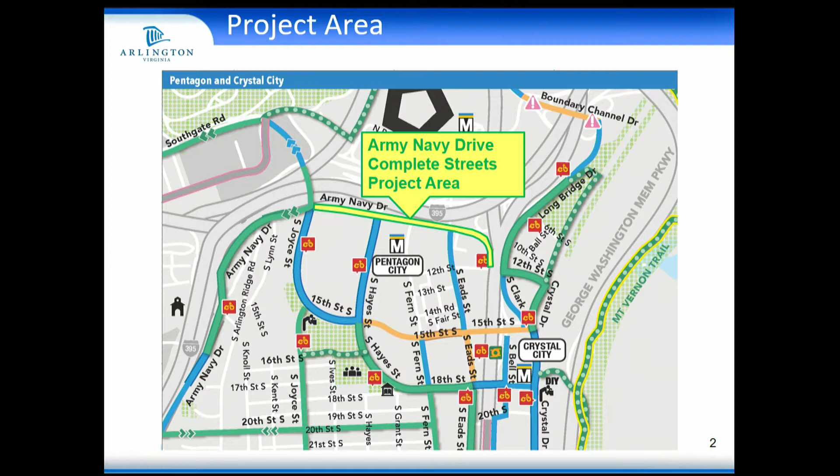Hello, my name is John Lawler. I'm from Arlington County DES. I'm the project manager of the Army-Navy Drive Complete Streets project. This is a 0.8 mile long project in Pentagon and Crystal City. It basically starts at South Joyce Street and ends at 12th Street South. The goal of the project is to make Army-Navy Drive a much safer street, and improve mobility for bikes, pedestrians, and bus users, as well as really making a nice complete street.

Today, this is probably one of the most unique streets in the county because, as you can see in these pictures, we have missing crosswalks and curb ramps and pedestrian signals at traffic signals. You don't really see that throughout the county. The road used to be VDOT right-of-way. Some of it still is VDOT right-of-way. VDOT transferred some of the right-of-way to the county as part of the Columbia Pike streetcar, back in 2011. The county does maintain Army-Navy Drive, but parts of it, like I said, are still VDOT right-of-way. It has a 35 mile per hour speed limit.

It's primarily designed to funnel commuters to and from I-395. There's heavy peak directional traffic, meaning that when you look at peak hour volumes, those don't equate to the ADT traffic. Most of the traffic is during the peak hours. When you go there at like 11 a.m., for example, there's hardly anybody on the street.

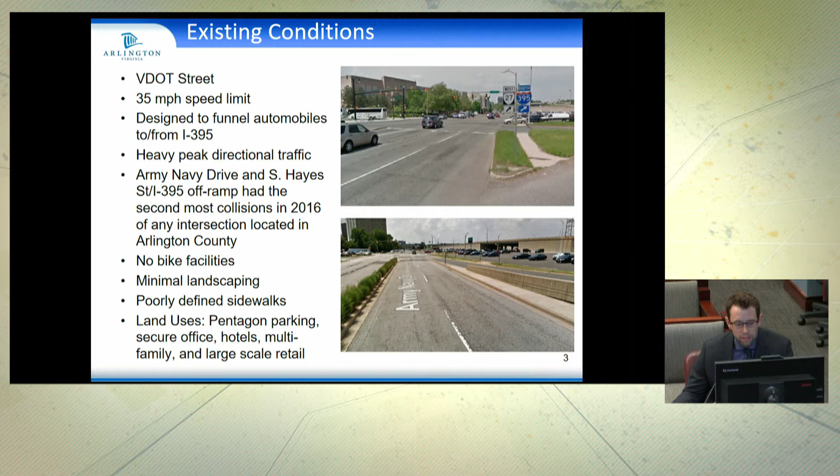The intersection of Army-Navy Drive and South Hayes Street had the second most collisions in Arlington County in 2016. It's typically ranked second or third in the county. There's no bike facilities at all. There's very minimal landscaping and very poorly defined sidewalks.

Our goal is to redesign it as a complete street. To improve safety, we're going to do that by narrowing the travel lanes, building a two-way cycle track along the south side, and adding protected-only left turn phasing at the signalized intersection. We're updating all the street lights and traffic signals, and we're going to plant a bunch of street trees. We're going to improve multimodal access, improve transit travel times and reliability, and really enhance Army-Navy Drive as a key entrance to Pentagon City and Crystal City, as well as reduce stormwater runoff.

We started our public engagement in December 2017, after our traffic model was approved by VDOT. We've reached a lot of people using a variety of tools and methods, such as SurveyMonkey surveys, design workshops, open houses, and meeting with the Bicycle Advisory Committee. We basically received a lot of data from the community as input for the project.

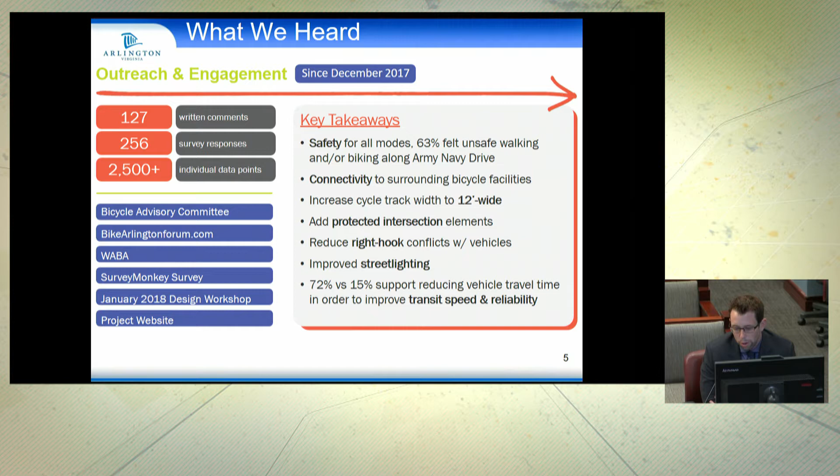Based on our survey, 63% of respondents said they felt unsafe walking or biking along Army-Navy Drive. They had a lot of issues with how it connected to the surrounding bicycle facilities. Our original concept showed a 10-foot wide cycle track, and the public really wanted us to increase that to 12 feet, the NACTO preferred standard, as well as add protected intersection elements where possible. They also wanted us to reduce right hook conflicts with vehicles and improve the street lighting. One other interesting factoid: 72% versus 15% supported reducing vehicle travel time in order to improve transit speed and reliability.

I'll start by showing you all the different sections. This is a 0.8 mile long project, so we'll go block by block. This is the first block, Joyce Street to the mall, adjacent to Pentagon Row and the South Hayes Street Pentagon parking lot. On this section, we'll have curbside dedicated transit lanes, and we'll always have the two-way cycle track along the south side. Here's an aerial view, and there's the plan view.

So we'll have a floating bus stop island here. I think this will be one of the first of that style in the county. Basically, we're consolidating the Pentagon City Mall stop and the Harris Teeter stop at this location, and this will improve the transit speeds through the corridor.

You can see the curbside bus-only lanes. At the intersection of South Joyce Street and Army Navy Drive, we're fixing the missing bike lane link along the Pentagon Row frontage. Currently, this block doesn't have a northbound bike lane, so we're addressing that issue.

We're improving the lane alignments here so that vehicles going eastbound at Joyce are aligned to the proper travel lanes. At the Pentagon City Mall entrance, we're shortening the entrance throat length for a shorter pedestrian crossing. You can also see protected intersection corner islands being added in the southeast corner of the South Joyce Street intersection, as well as the southwest corner of the Pentagon City Mall intersection.

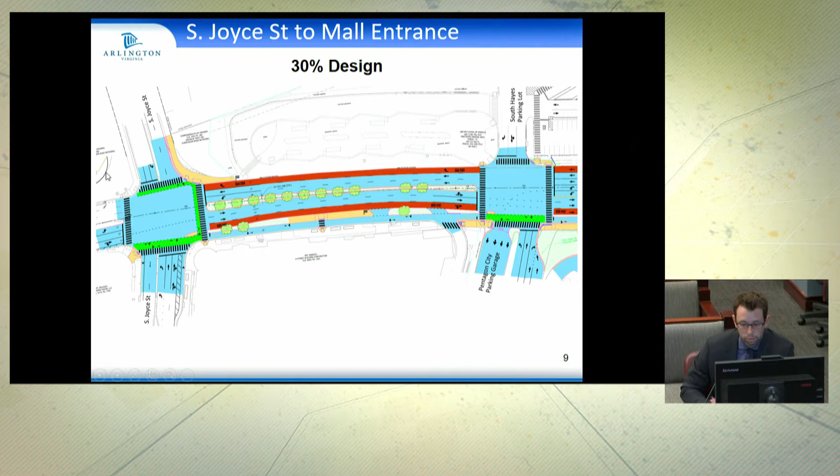The next section, moving east, is between the Pentagon City Mall and South Hayes Street. Here's the aerial view of this section.

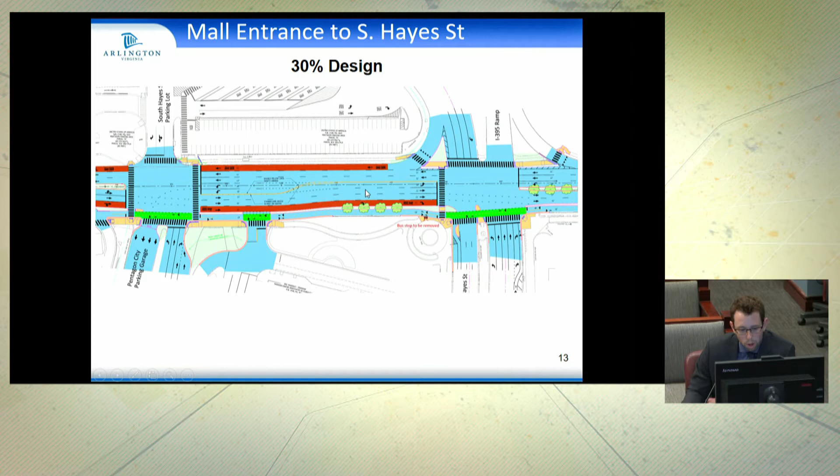On this section, we're adding a second left turn lane to turn into the mall. Our traffic model showed that in the morning peak hour, this turn lane was backing up onto I-395, causing a lot of gridlock and delays. We were also concerned about the safety issues of people getting rear-ended on the ramp, so adding that second left turn lane addressed all those situations.

As a reminder, all the left turn phasing at the signals here is protected, so there's no conflict between the left turns and the crossing pedestrians and bicyclists.

We also consolidated several of the Pentagon City Mall entrances into just one right-in, right-out intersection. Unfortunately, since we lost the raised median on this part, we're using flexi posts to restrict that left turn into the entrance. In the southwest corner of the Hayes Street I-395 ramp intersection, we're adding a bend-out to improve the setback distance for bikes crossing there so vehicles get good visibility.

This intersection doesn't have a conflict between the right turn and the crossing pedestrians and bikes, because we're protecting the phasing here—one of the only right turns so far that we know is protected. So when the right turn has the green arrow, there won't be any pedestrians crossing at this intersection. We also flipped the northbound bike lane and the northbound right turn lane here, because bikes can't travel north onto the I-395 ramp, which eliminates that right hook conflict.

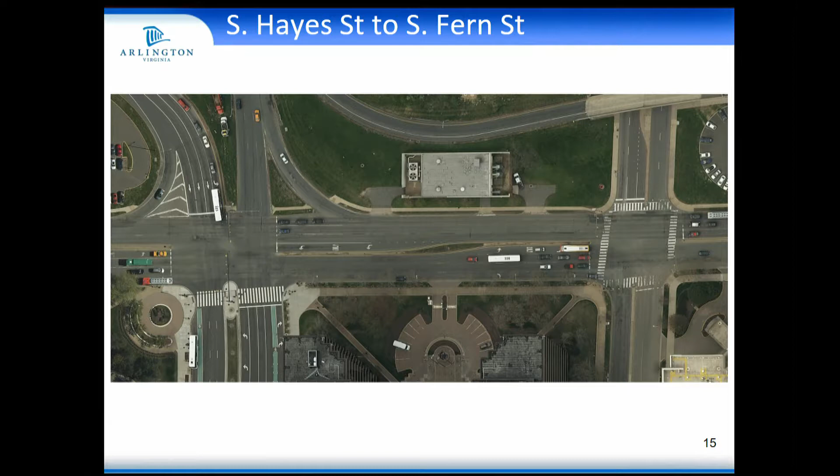The next section is Hayes to Fern Street. It's pretty much the same setup: we have the cycle track along the south side, generally two travel lanes in each direction for moving traffic as well as turn lanes. At the South Fern Street intersection, we do another bend-out to improve visibility for bikes, and also give cars room to sit and wait for a gap without feeling pressured by vehicles behind them to turn too quickly.

Between Fern and Eads Street, again it's two lanes for traffic as well as turn lanes. Eads Street has other plans for continuing its protected bike lane network that we're tying into. However, these require the PenPlace development to widen this side of Eads Street to get the proper roadway width. The Express Lanes project improved the north approach on Eads Street and widened it to add turn lanes so people could get off the express lanes quicker.

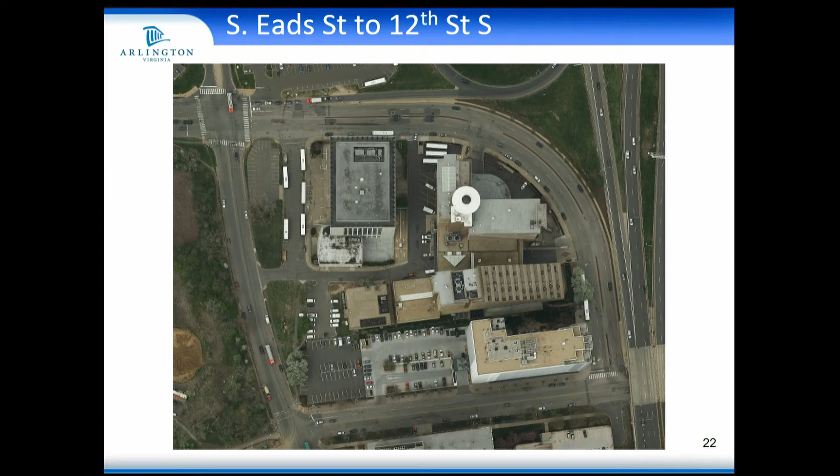One important thing to note at the Eads Street, Army-Navy Drive intersection is that we're restricting the westbound left turn. This is because there wasn't much volume doing this movement. Our traffic model showed that people coming off the Route 110 off-ramp were weaving with traffic going west on Army-Navy, which wanted to either go through or turn right onto Eads, causing a lot of delays and safety issues. So we restricted that left turn. The community hasn't been opposed to this—everybody's been in favor of it.

So I'll talk about the final block, between Eads and 12th. This block's much different from the other four blocks we've been discussing. Basically on this block, the vehicles per day drop drastically. It's only about 6,000 vehicles per day, whereas the other blocks are about 20,000 vehicles per day. So on this section, we're going down to one lane in each direction.

On the north side, we're adding a tour bus parking lane, a 10-foot wide parking lane for the tour buses. That's to offset a lot of the tour bus parking losses that have happened throughout the rest of the county as a result of development projects or road diet projects and things like that.

The fire department made us get rid of the raised median because they wanted 20-foot wide road clearance. So we had to do that. Basically we pushed the road as far to the north as possible, and that gave us a lot of room for this protected bike lane buffer on the south side.

So that really gives vehicles a lot of room to queue up. They can basically pull around, stop here, wait for a gap on that cycle track, and then cross the cycle track to turn into the hotel or 400 Army-Navy Drive. Most of these accesses are right-in, right-outs, or outbound only accesses on this section.

And then the intersection of 12th and Army-Navy will be signalized by the 12th Street project, which you can see there. And so that's the end of the project.

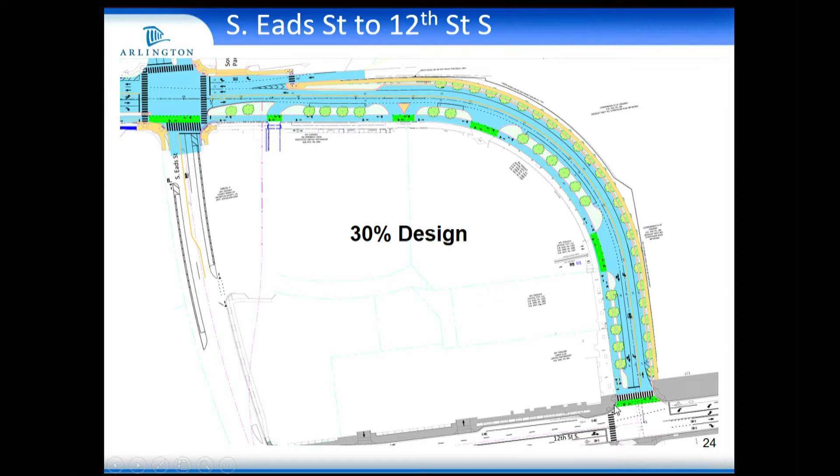For streetlights, we're following the approved county streetlight management plan and doing overhead teardrops that will be county maintained. Streetlighting was important to all the folks we talked to, so we'll be replacing all the streetlights in the project area with these. We haven't decided yet if they'll go in the medians or in the bike lane islands or where. But here's where we are in the schedule.

So we did the community open house earlier this week, and tonight I'm presenting to you all. Basically after that, we kicked off the value engineering study for this project.

So we have federal funding, so we have to do a lot of extra requirements that most projects don't have to do. So we have to do value engineering. Our plans also go through VDOT central office because the project is $18.5 million, so it's over that $15 million construction threshold.

So therefore we have to do the NEPA analysis because of the federal funding. So we're hopeful to do the environmental public hearing in the fall and then finalize that 30% design plan by the end of the year and get the 90% started.

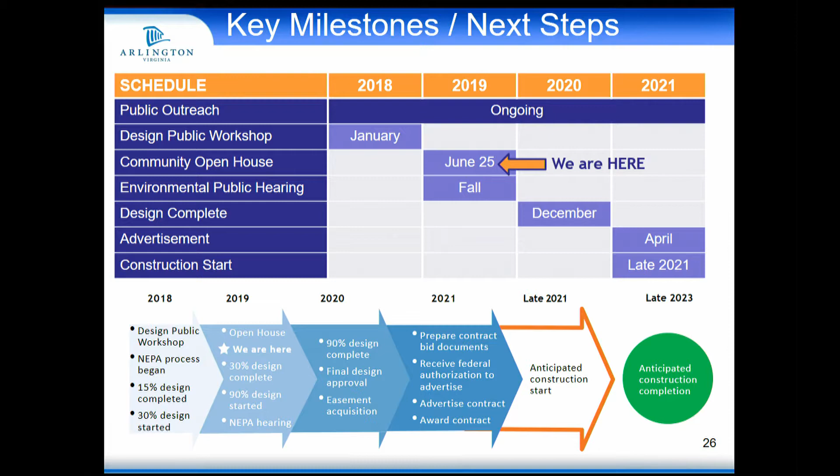And then 2020 will be pretty much finishing up all the design work and acquiring our easements. Then 2021 we'll be preparing the construction bid documents and getting our federal authorization to advertise the contract for construction. So therefore we hope to start construction in late 2021, and we anticipate the project will take about 2 years to complete. And here's the link to the project website.

We're opening the comment period on the 30% design plan tomorrow, so we have just a short 3-question survey. Then we're trying out a new tool where people can go in and add comments on the actual design plan. So any questions?

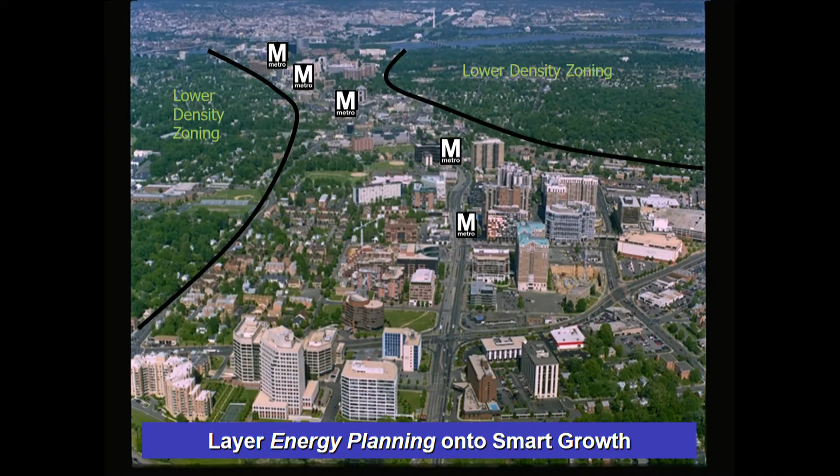The energy planning layer is one we envision layering over the smart, intelligent land use and transportation planning that's taken place over the last 50 years or so. With the Master Transportation Plan, we fully embrace multimodal transportation as espoused in the MTP. But we also recognize where people have to use vehicles, so we're looking at electrification and electric vehicles as a route for people to go, which is what we're advocating as part of this plan update.

As part of those efforts, from 2007 to 2017, the cost savings is just under $5 million per year from the community and county government's perspective, related to AIRE program outreach and various other activities and initiatives. In addition, we've been able to drop our greenhouse gas emissions by 24% during that same time frame.

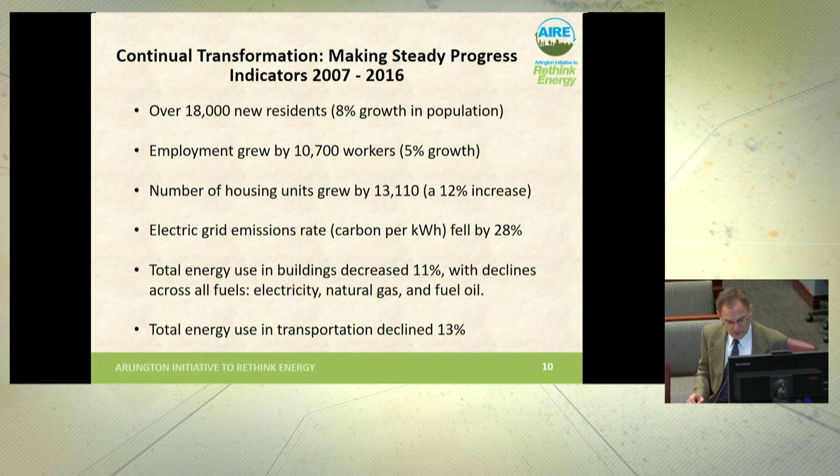This is another way of looking at it: two primary areas where greenhouse gas emissions come from are transportation and the building sector. We started our baseline in 2007 at 12.9, measured in metric tons of CO2 equivalent per capita per year, and it's driven down to 9.1 in our 2016 greenhouse gas emissions inventory. We're making steady progress even though there's been growth in the number of residents, workers, and housing units in Arlington. The grid has gotten cleaner, and the transportation sector has contributed with energy use declining 13%, as well as buildings becoming more energy efficient with an 11% drop in energy use.

This is a very timely update. There's been a lot of change during the last five years in the energy sector and marketplace, as well as activities at the state and international level. There are reports from the Intergovernmental Panel on Climate Change painting a rather bleak picture, and a lot of the feedback we've received over the last year from various groups is that it's imperative that we act sooner rather than later in addressing climate change issues.

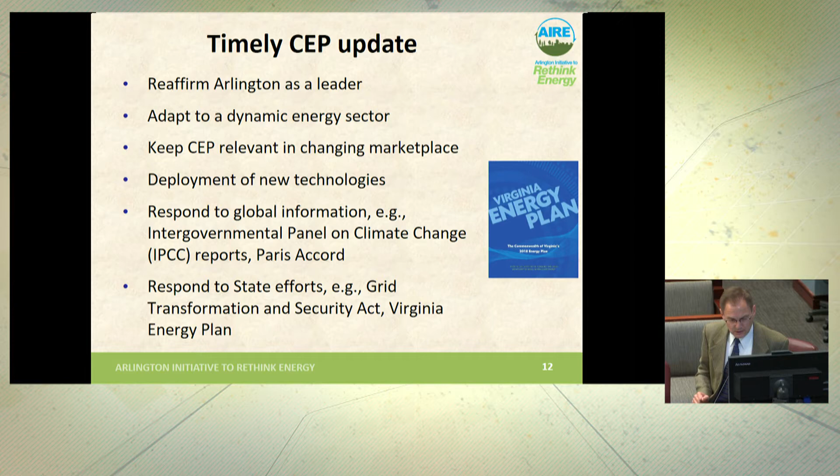As far as community engagement, we've had some major forums. November of last year over at George Mason University, we had 80 representatives from the community who knew about the community energy plan and are knowledgeable about the energy sector come and participate in that forum. And then we had a couple of other follow-up forums at the end of May and the beginning of June of this year.

In addition to those forums, we've also met together with the E2C2, the Energy Committee part of E2C2, as well as working together with consultants to do an updated greenhouse gas emissions inventory, energy model, and conducting market research to make sure that we are kept apprised and staying ahead of the game in terms of those changes in the energy sector.

We've drafted the community energy plan update. It went live May 24th, and since then we've had a June 25th County Board work session earlier this week and gotten additional guidance that I'll talk about in a few moments that have continued to update the community energy plan. In addition to the community feedback, we've also reached out to our colleagues within multiple agencies throughout Arlington County, including our transportation staff, to ensure that we are in concert with the various initiatives happening across multiple departments.

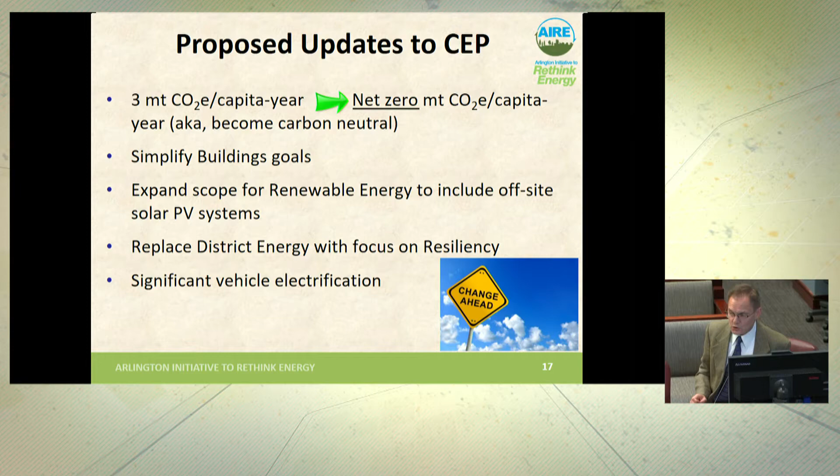Renewable energy is looking outside the county for contractual agreements to enhance solar PV installation outside the county, while at the same time cleaning our grid for residents of Arlington. We talked about resiliency being a new chapter, and last but not least, the electrification of the transportation sector is something we're keeping an eye on and trying to make sure we are set up to take advantage of it full sail.

In terms of the progress, the top line in this graphic shows the line we drew in our 2013 plan from our baseline year all the way out to 2050, gradually dropping down to 3 metric tons. We're updating this graph, as noted by the asterisk. We haven't had time to update the model, but we are working to update it to show how we will get to carbon neutrality by the year 2050, with a breakdown of the various things that will contribute to us reaching our goal.

The top line, the dashed line, is business as usual. It recognizes there will be growth throughout the county, an increase in housing, jobs, housing units, and population. In addition to that, we want to get down to zero, so we're saying the grid, through on-the-books reductions as well as proposed changes to the grid, will drop us over 30% of the way toward our goal. Renewable energy, both in Arlington and outside Arlington through those contractual agreements I mentioned, will contribute just under 10%. The buildings becoming more energy efficient.

And then last but not least, the yellow wedge shows the increase in efficiency in the transportation sector, helping us reach down all the way to about 1 metric ton. That final wedge, the hatched area, is a mix of a variety of things that can happen, whether it's disruption from different technology advancements or using carbon offsets.

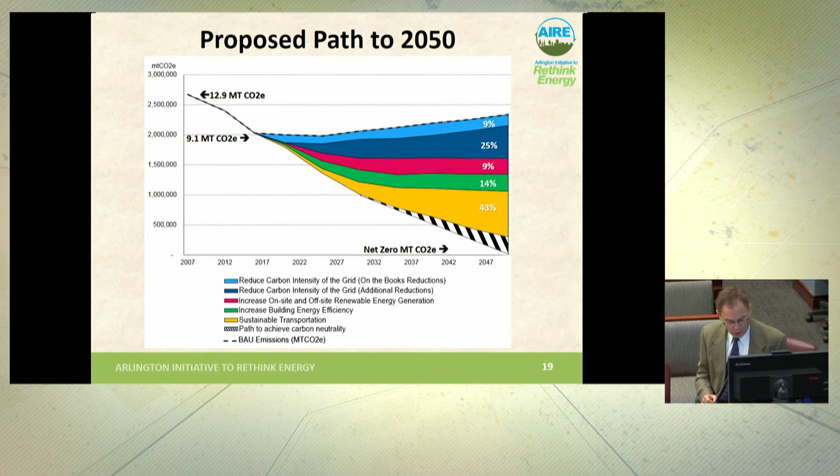As of right now, it is an aspirational goal as we reach to carbon neutrality by the year 2050. This is just to note that there's a lot of variables in play between now and 2050, and we have mapped out a scenario through our energy modeling to get us there, but we also recognize that we aren't able to forecast precisely throughout those years.

So if the grid doesn't get quite as clean as we anticipate, that puts more pressure on the building sector, the renewable energy sector, or the transportation sector to help contribute to get us to our goals. So for the county work session, we asked for guidance on 3 primary areas.

First of all, we went to the board recognizing 1 metric ton was a realistic yet still ambitious goal to reach, but we also wanted to recognize the community was clamoring for 0 metric tons, or net zero, or carbon neutrality.

In addition, the second question was regarding renewable electricity, and to what extent should we put more emphasis on renewable electricity goals, both for county government operations and for the community. Last but not least, we recognize the challenges in doing these various things. We didn't want people to be left behind as we strive to achieve our goals, and how do we address energy equity throughout this whole process.

With renewable electricity, there are many different ways in which we can go ahead and reach our goals. They are listed there, I won't belabor the point, but there are many different avenues and different ways in which it can be done. As for the targets, these are new proposed targets that are in an update forthcoming for that request to advertise report.

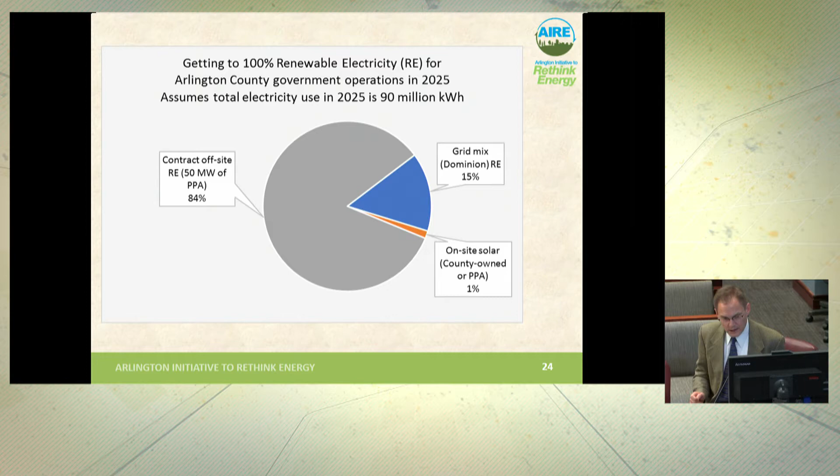In terms of the vast majority of ways in which we can go ahead and do that, it will be through those off-site renewable energy contracts, to the tune of 50 megawatts of power purchase agreements, contributing to 84% of our share of getting to that 2025 goal of 100% renewable electricity for county government operations.

As for the community, this mirrors an initiative set forth by the Sierra Club, and that's 100% renewable electricity for the entire community by the year 2035.

How we get there is a bit more complicated than for county government, but it's still something that we recognize is possible. The grid gets cleaner to the tune of one third of the grid, with the source being renewable energy.

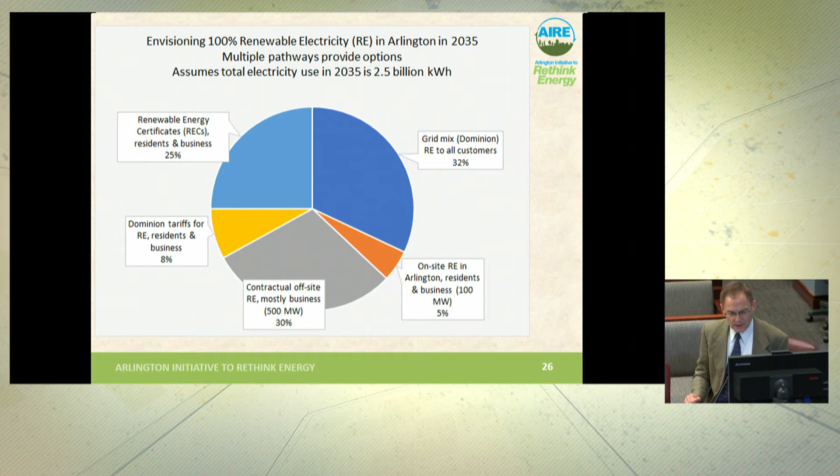In addition to that, we increase the amount of on-site renewable electricity by 100 megawatts by the year 2035. Those contractual agreements for off-site renewable energy, and then also a mix of tariffs and something called renewable energy certificates can be purchased in order to reach our 100% renewable electricity goal.

For energy equity, this is the definition that we currently have in the draft. This is in coordination with our Department of Human Services, and it's recognizing that, yes, economics play a role, as do energy security and the environment.

But we want to make sure that folks from all socioeconomic and racial and ethnic groups are able to take advantage of the various initiatives, whether it's electric vehicles, solar PV, or other initiatives helping us reach our goals. We don't want anyone to be left behind.

So this is the rest of the process. Again, this has been over a year in the making, with a variety of discussions happening throughout many different meetings. We're going to continue to go to various commissions and community groups to talk about the changes to the community energy plan. The board report goes in July for the request to advertise, for action in September.

In addition to action on the community energy plan update, there's also a green building incentive policy that is one of our near-term implementation items, and that will come forward to the board at the same time.

And then last but not least, we do have a variety of tools that are listed in our implementation framework, and in that implementation framework, we're envisioning, once we get clear guidance from the board through adoption of renewed and updated policies, we would update that community energy plan framework accordingly in order to find out how we're going to reach our goals moving forward.

Before I entertain questions, I want to highlight that in the transportation sector, there was one policy that mapped out milestones of how we reduce our greenhouse gas emissions over time. That was one policy in that goal area. We still have that, with updated targets all the way down to 0.5 metric ton by the year 2050.

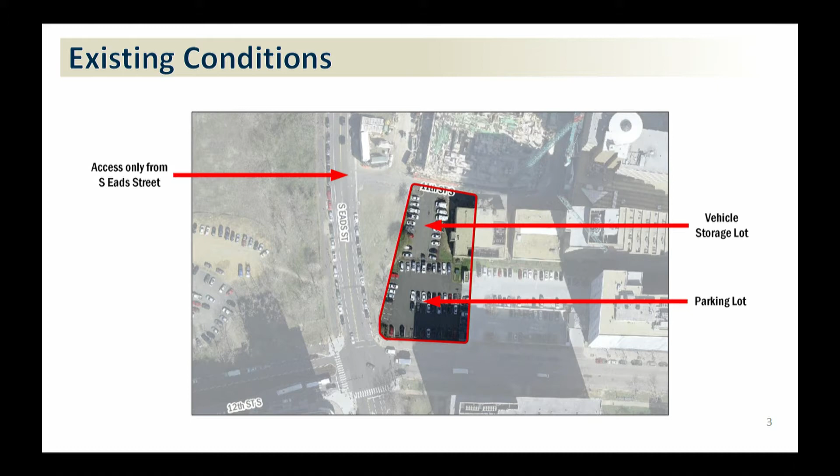If we take a look at the next slide, I want to take some time walking through this. I realize it's a busy slide, but if you look at the red dashed line, those are the boundaries of the parcel. You can see this is a very narrow parcel, there's not a lot of room to maneuver east-west here. So the developer and the architect have had to work very hard to design the site in a way that works within those physical boundaries.

A few other things to note are the site access. Just as there is no site access except from 11th Street looping down south today, that's going to continue in the future. 12th Street South is recommended to be part of the transit way, and we have a very nice walkable retail environment there that we wouldn't want to interrupt, so there can be no curb cuts there.

As you can see, to the west of the site is a county-owned property, a portion of what's been known as the Teardrop parcel. That area will not be suitable for a curb cut, particularly because of the bike lanes running along Eads Street. So a pretty significant constraint in terms of access — we really only have a single option to do that.

The other constraint to mention is utilities. This site is really heavily burdened with utilities. The Teardrop parcel portion is pretty much full of utilities serving the local area. There's also a utility easement on the east side of the site — it's not shown here, but that's why we're pushed back from the property line on the east side. And even 11th Street South has some significant utilities here. So we're bounded basically on every side by utilities.

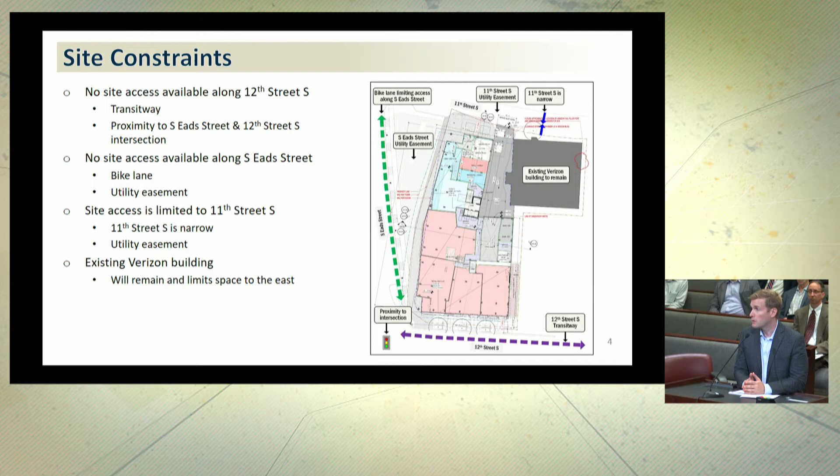If you move to the next slide, this is our plan again overlaid here. The proposal is for a multifamily residential building with 306 residential dwelling units, just under 11,000 square feet of ground floor retail, and below grade parking.

Just to walk you around the site for orientation — on the south side, there's a significant amount of retail. We're very excited about the activation of 12th Street; we think this is going to help catalyze and play off a lot of that success at the Bartlett and elsewhere as we move farther west on 12th Street. As you go up Eads Street, that retail continues around the corner, with the residential access pushed back along Eads so there's a full and active retail corridor before we get there.

On the north side, on 11th Street, you can see there's a pickup and drop-off area for your Ubers and Lyfts.

And then looping around to 11th Street and down that corridor, we've been able to consolidate basically all of the back of house functions to the back of house. There is loading - you can see the Verizon trucks, the residential and retail loading, as well as access to the ramp down for the parking garage.

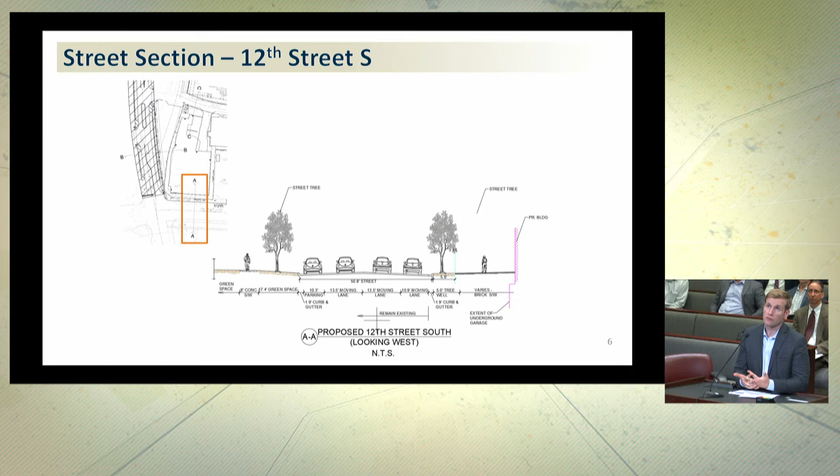So if we move to the next slide, a couple of street sections. I won't dwell on these except to let you know that they're consistent with the recommendations of the Crystal City Sector Plan, which applies here. So here we've got 12th Street. The next slide will go to Eads, and then to 11th Street as we work around the building.

Great. And so then for the next slide, I want to give you an overview of the transportation elements here. Really walkable site, walk score of 84. We're in very close proximity to both the Crystal City Metro Station and the Pentagon City Metro Station. There are also a significant number of bus routes here, 16 in the immediate area, and a really robust pedestrian and bicycle network nearby.

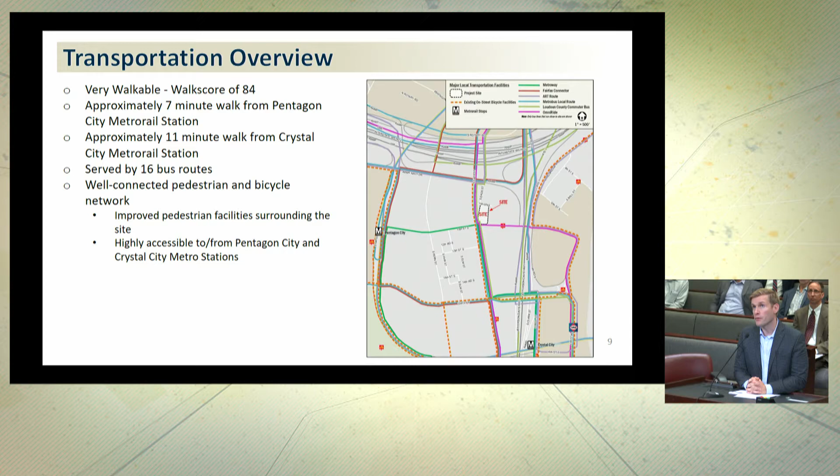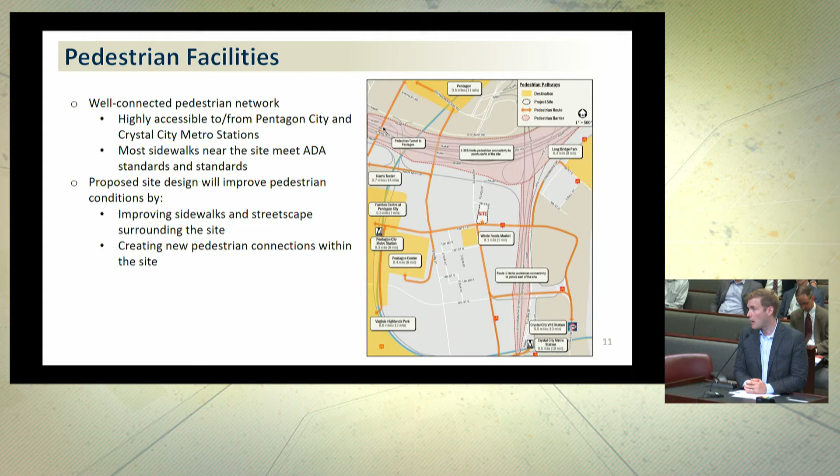On the next slide, a little more information on the pedestrian facilities. I really like this slide because it shows you how many great destinations are within a very short walk from this site - not only the metro access, but the ability to walk directly to a lot of these facilities. There are pretty good pedestrian facilities here today, but with this project we are going to build out the sidewalks along 12th Street and along Eads Street as well.

And then the next slide will give you some information on the parking. The graphic here is an excerpt from the residential parking working group policy that was adopted. And as you can see, based on this site's proximity to Metro, we could go as low as a 0.4 ratio under that policy. The applicant has taken a look at this - they think a 0.44 is the right number based on the market here. That results in 134 parking spaces rather than the 122 minimum that would be required in a 0.4 scenario.

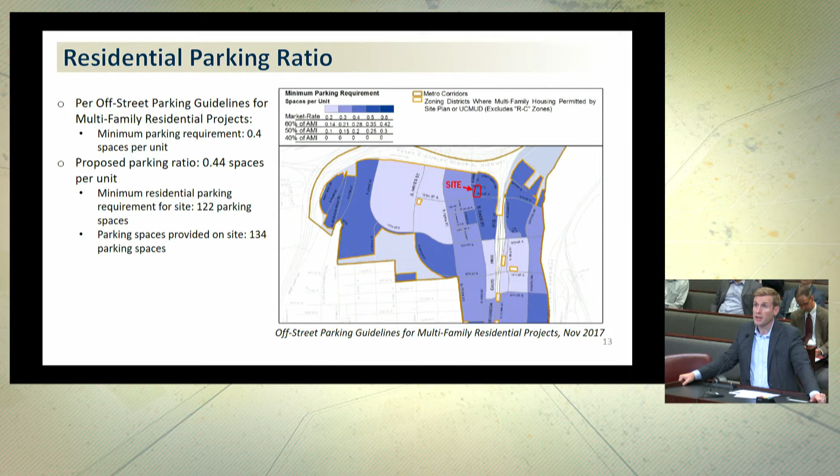Next slide, the pedestrian circulation - this is one we're very excited about. As I mentioned, some great retail presence along 12th Street, a lot of permeability there, and it does wrap the corner onto Eads Street. You'll see there the teardrop parcel, which I mentioned previously - that's that wedge-shaped piece outlined in blue. As a result of that, there are kind of 2 pedestrian paths as you move north along Eads Street. We will be able to either take that outward western swing to be right on Eads Street, or a path that really hugs the side of the building and is closer to that building.

So the county owns that parcel. They are trying to make a determination as to what to do with it. It's certainly our hope that this would be publicly accessible open space, and we think there could be some really great synergies with the retail and the residential entrances playing off that open space there. So speaking of the residential, you can see that that's going to have 2 entrances off of Eads Street north of the retail.

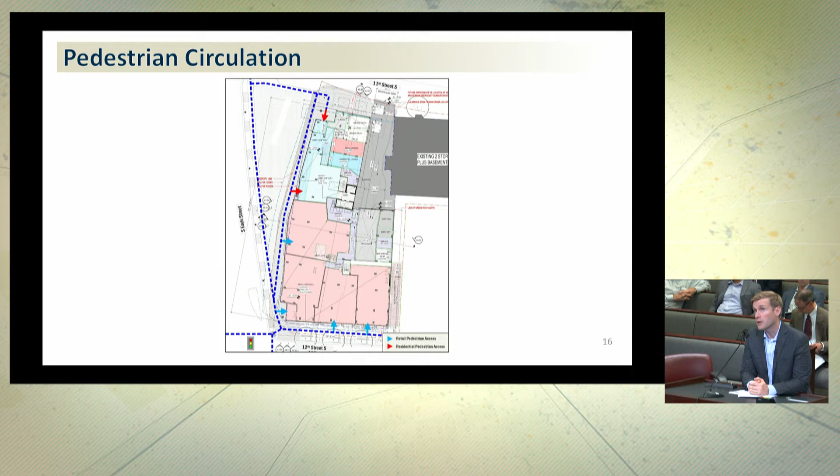So for the next slide, bicycle circulation - just kind of the same old story here. We're coming off of 11th Street down that loading corridor. There's an entrance to the building for bicycles, as well as the ramp down to some of the bike parking.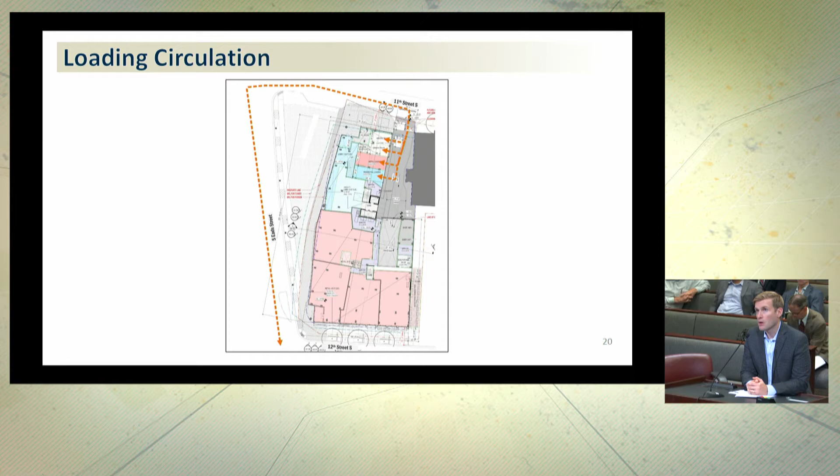Next slide is the loading. I want to take time to talk about this because it's really where the constraints I mentioned earlier come into play. We have a very narrow site along with a requirement to take 2 loading spaces and give them to Verizon. We've worked very hard to design this loading in a way that does not impact the ground floor. We're excited about how the ground floor is going to operate, and taking chunks out of it with additional loading spaces makes it very difficult. Nevertheless, we've managed to put in 1 retail dedicated loading space and 1 residential dedicated loading space. This is something we're continuing to work with staff on, but this is where we are at this point.

On the next slide, more information on those loading spaces, the truck turns for the retail, and the next slide will show the residential.

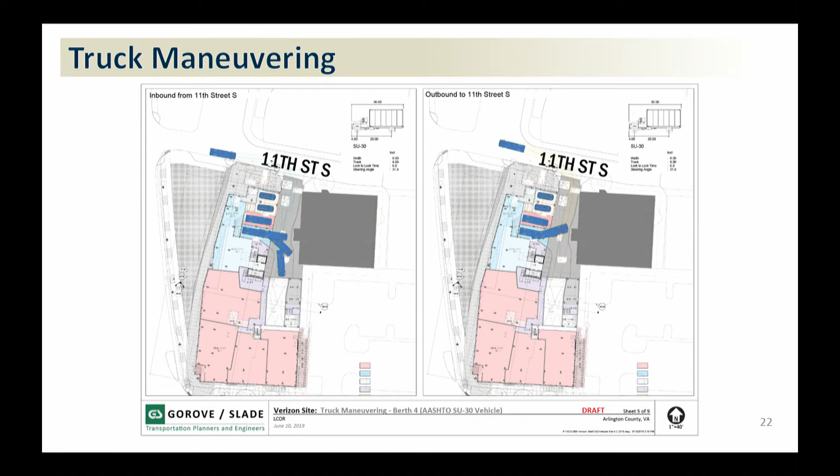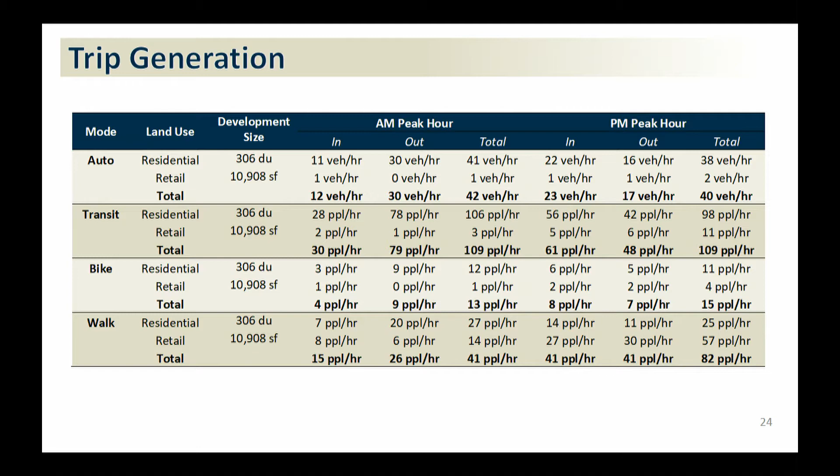On the next slide, some of the trip generation numbers. I was really interested in the number of transit and walking trips compared to auto here. Pretty interesting to see that we really are getting to that multimodal environment that we've seen for this part of Crystal City.

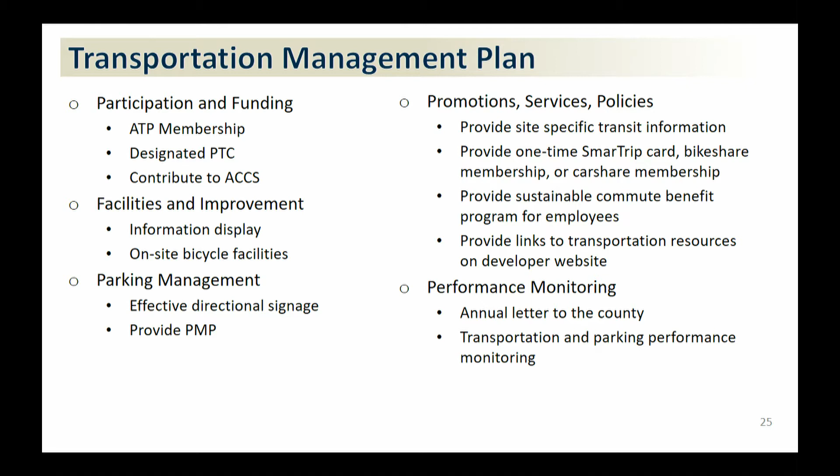And finally, the last slide, this is our transportation management plan that's being proposed. It is what you are accustomed to seeing for projects of this type and size. So that's the entirety of our presentation. We'll be here for any questions, and I appreciate your time. Thank you.

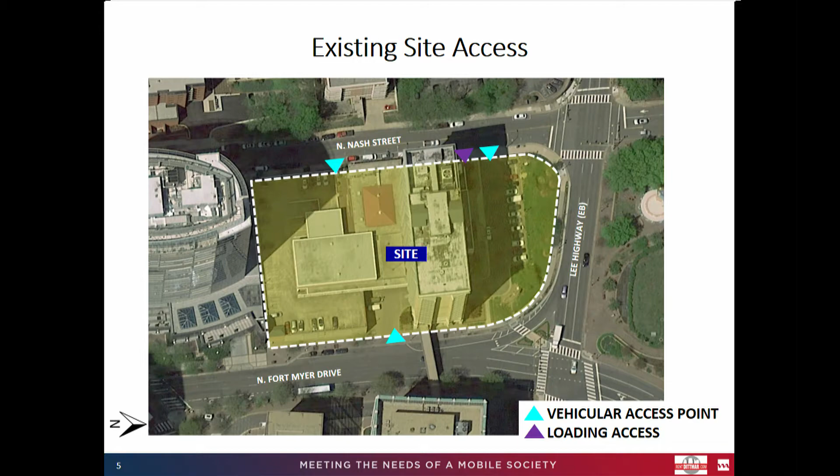This slide shows the existing site access points to the property. On the west side on Nash Street, the northern end is the access to 20th Street. There's 14 parking spaces in the parking lot, which leads to the parking garage that is below the hotel.

Also along the west side, south on Nash Street, is the loading dock that you can see, and then further to the south is the other driveway to the parking garage. There's one access point on North Fort Myer Drive that pulls in front of the building.

This is the proposed access scheme. I'm sorry, I should have mentioned that it's oriented plan north to the right, for consistency. Along North Nash Street, the access to the parking garage for the residential building is on the northern end.

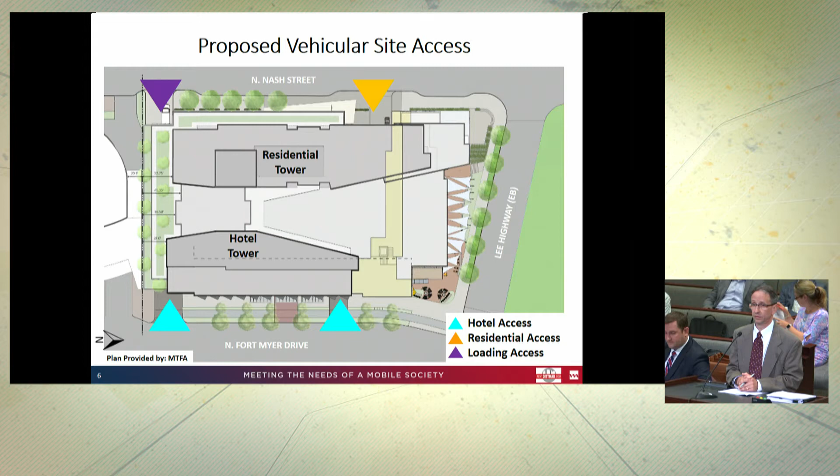And then further down to the south is the loading dock. It's adjacent to the Turnberry loading dock. And then on the east side on North Fort Myer, the northern driveway is inbound only to the porte cochere for the hotel. Further to the south, a two-way driveway leads to the below-grade parking garage.

So I'd like to walk through the street sections that we have. All of these street frontages will be upgraded with the site redevelopment, which will include upgrading the sidewalks and such.

This shows the pedestrian circulation that's around the site. So along North Nash Street, a sidewalk, street trees and such. You can see where I mentioned previously the garage entry and the loading dock access.

And then along Lee Highway, a public sidewalk widening there, and along North Fort Myer Drive, also shown is the sidewalk area, the cycle track, and the main access to the hotel.

What's shown just to the northern portion of the site is the pedestrian pass-through that goes from North Nash to Fort Myer Drive. What you see in the northwest corner, that blue area, is where the sidewalk slope is greater than 5%. So it's an existing condition there, but we wanted to point out that the ADA access would be through the pass-through shown just to the south of that.

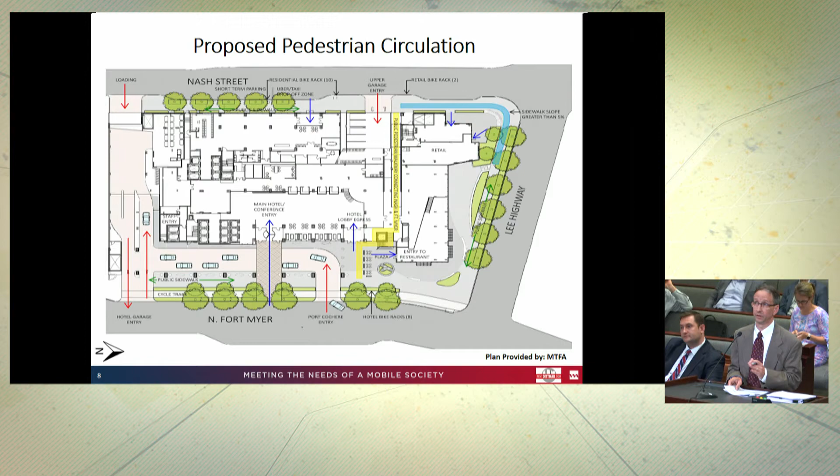So this slide shows the porte cochere, and when we looked at this assignment, we thought about holistically how it would work and how it would need to manage day-to-day operations along with various events at the hotel, given the significance of the conference center.

So what you see here is the entry that I mentioned along North Fort Myer on the northern portion of the site where you enter. It's a 27-foot wide passageway.

Under this condition, this is sort of the typical day condition where there would be a drop-off, pickup. This area will be well managed. The parking will be valet parked at all times. So this will be highly managed through the events.

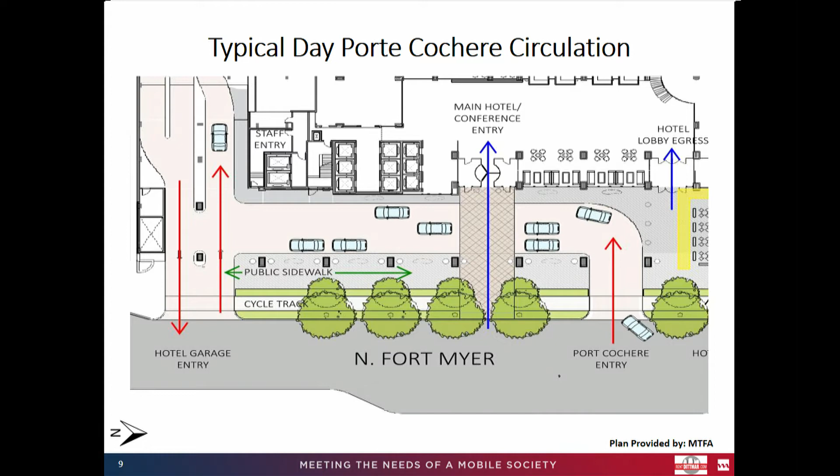You can see to the south where you come through the porte cochere, that's the access to the parking garage, coming back down and then coming back out to leave the garage. The other thing I'd mention is along the sidewalk, the intent is to have a clear pedestrian access that takes you to the building, and also to alert pedestrians and cyclists along the cycle track by using a different pavement treatment, so they're aware they could be encountering pedestrians through that area.

This one is the event day circulation. We anticipate there'll be a number of large events here, so we took a look at what the queuing and storage requirements would be. This would hold about 10 to 12 vehicles. It really is a function of the valet service, which will have to manage those vehicles during these events. We feel this is about what's needed to ensure we don't create traffic problems along Fort Myer Drive that could spill out to the north and reach Lee Highway.

Now we can talk about the loading access. The loading dock is located on North Nash Street on the southern portion of the building, adjacent to the Turnberry driveway, consistent with the Rosslyn sector plan. What's shown on this slide are the various trucks that will use the loading facility: a trash truck, a small box truck which is an SU-25, an SU-40 which is a larger straight truck or box truck, and then a large WB-50, which is one of the tractor trailers.

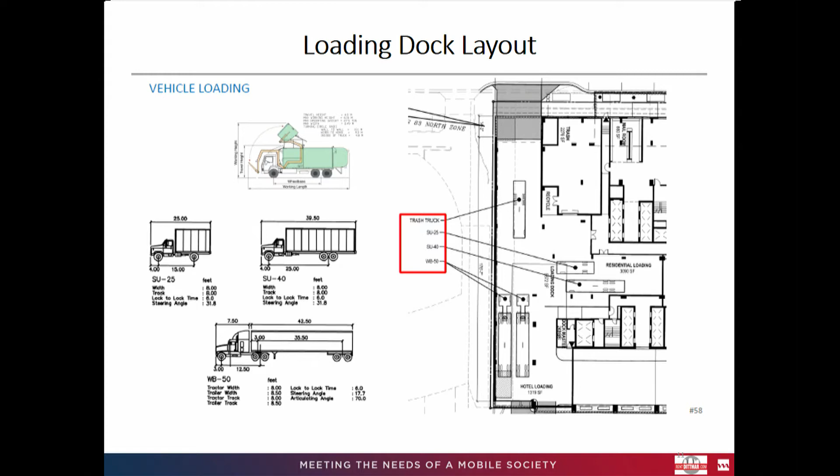These are the loading circulation movements from North Nash Street. This shows the largest truck, so I want to emphasize that this is not only the largest truck, it only represents about 20% of all the truck deliveries that will come to the building. The residential, the hotel, all the loading will be enclosed in this space. On the left-hand side, you can see how a truck would pull beyond the driveway, back into the loading area, the door would close, and all the activity would be enclosed within that area.

The driveway itself - when we talked at SPRC, I mentioned the driveway apron would need to be wider. You can see on the drawing, in the northwest or northeast corner where that curb return is, the driveway is widened there to preserve the on-street parking on North Nash Street. The driveway width for a pedestrian along the sidewalk stays at 35 feet, but the driveway apron picks up another 10 or 11 feet, going to about 45 or 46 feet. In order to preserve the parking and accommodate large trucks, they would travel along North Nash Street, backing in and then continuing north, going out, as you can see on the right-hand side.

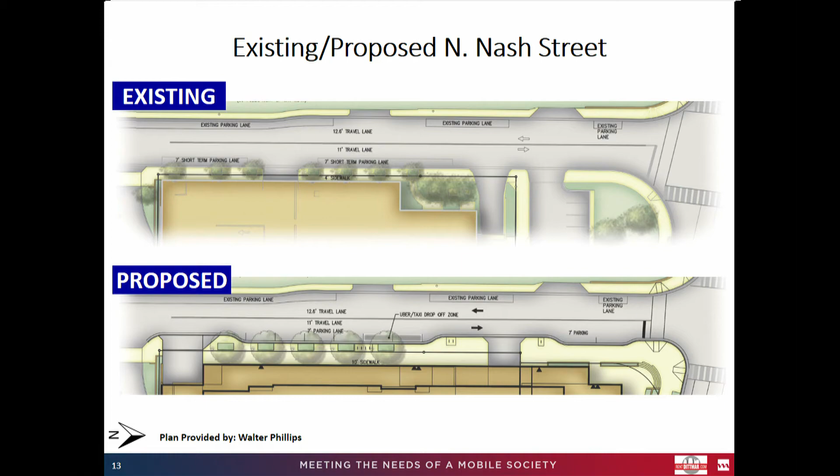Walking through the street sections, the first is North Nash Street. On the north side, as I mentioned, 3 access points are consolidated to 2 driveways in the proposed section. The corner would maintain the on-street parking, and there'd be a 10-foot sidewalk along the frontage, much larger than the 4 feet that's out there today. There are also curb extensions planned along that route to reduce the crossing distance at Lee Highway.

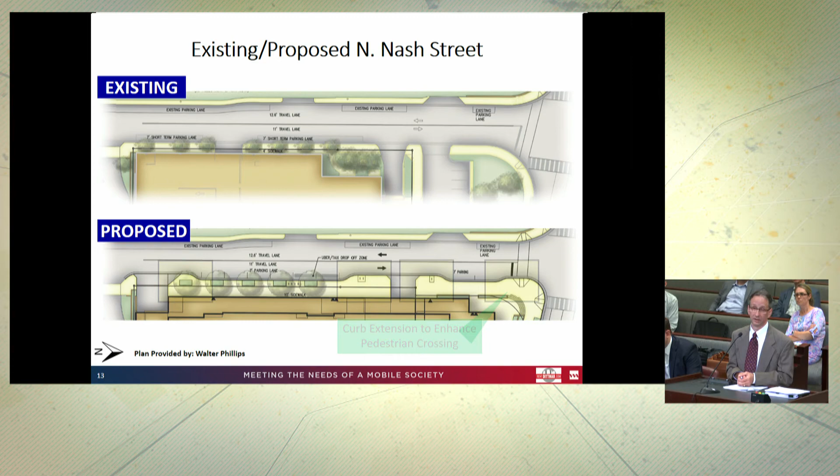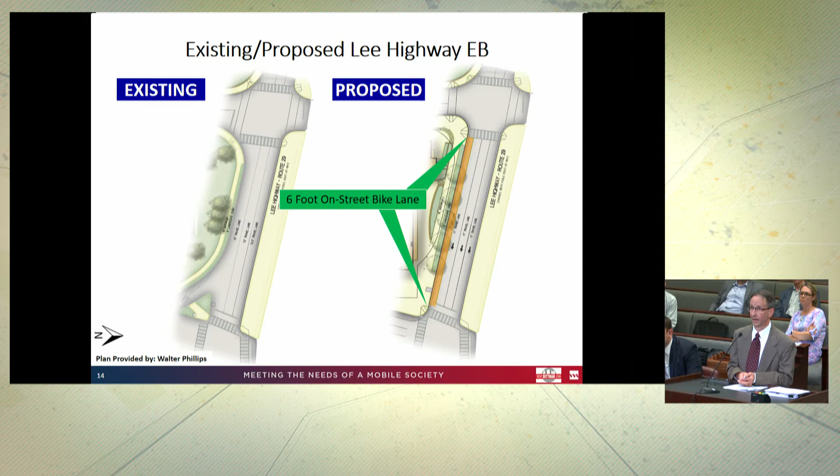This shows the existing and proposed sections along eastbound Lee Highway. Currently there are 3 eastbound travel lanes. Under the proposed design, the sidewalk would be widened to 8 feet while maintaining 3 travel lanes. There'd be a slight shift in the curb, which helps pick up a 6-foot on-street bike lane in that area. Also, the removal of the channelized right turn lane at the corner again reduces crossing distance, creating a safer situation for pedestrians.

This shows the North Fort Myer Drive section. On the north side currently there are travel lanes, a parking lane in front of the site, and 1 driveway. Under the proposed condition, there would be 2 driveways - the northernmost inbound, the southernmost 2-way - then a sidewalk 10 to 12 feet along the site frontage. There's also an 8-foot cycle track along the site frontage, elevated in that area so vehicles know what they're crossing as they drive in and out. Also, the 4 parking spaces would be maintained under these conditions.

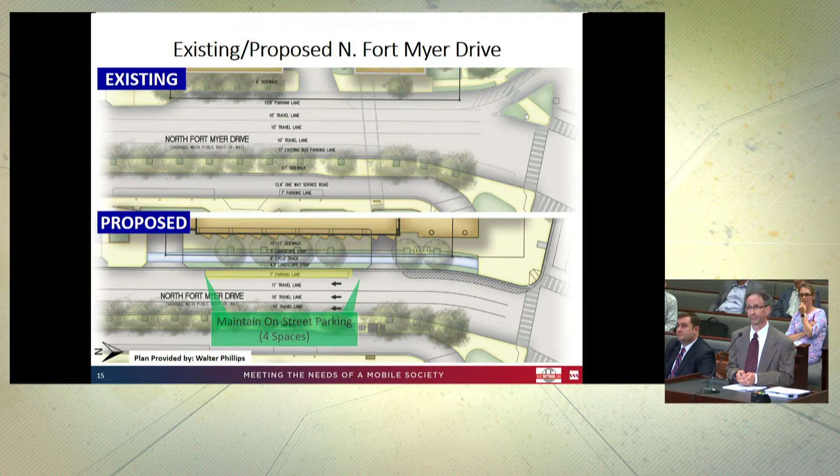So what we're showing here is the ultimate condition, based on the Core of Rosslyn study. This takes in the recommendations of going to a 2-way. There are 3 southbound travel lanes maintained, and the cycle track, landscape buffer, and such would also be maintained. On the eastern side, one of the travel lanes would be converted to northbound, and we would pick up a 7-foot parking lane in that area.

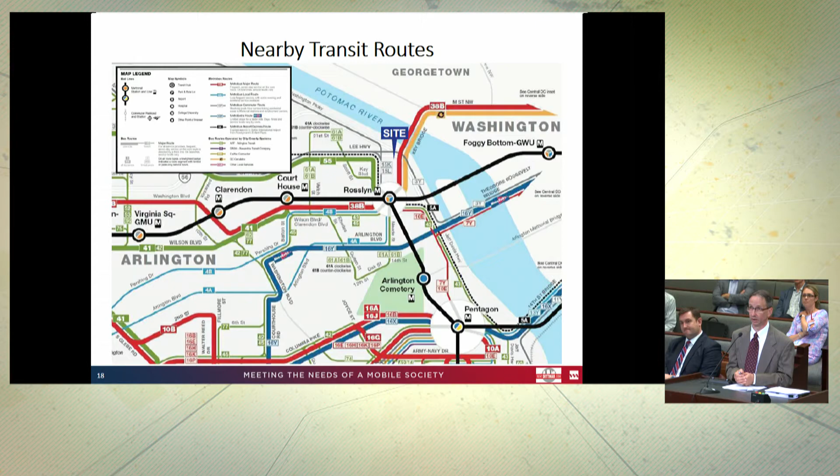So I'd like to just run through the multimodal facilities. We know that this area is well served by transit. There are a number of facilities here. The walk scores are well above the 70s and 80s for walking and biking. There are a number of transit routes as shown on site here at the Metro Rail Station, and bicycle facilities exist around the site.

Also, a bicycle sharing station is on Lynn Street, very nearby. And with the Core of Rosslyn plan, there's a set of bicycle facilities that are all interconnected that will really improve cycling in Rosslyn.

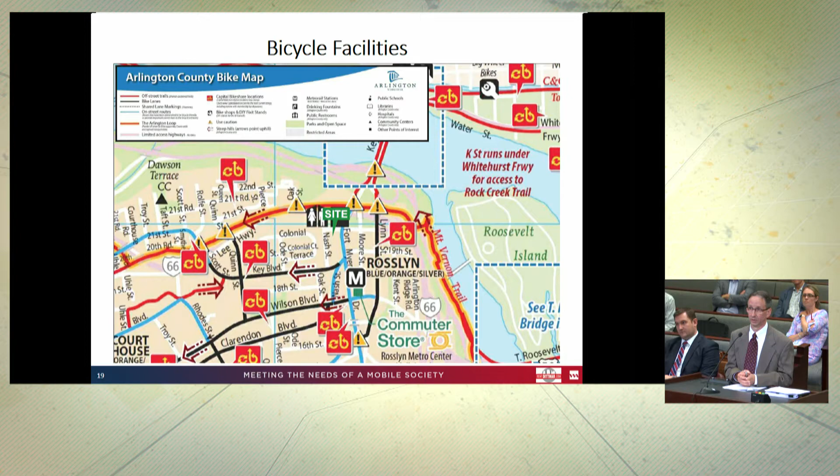This slide compares the trip generation estimate. Under existing conditions, the hotel conference space today is estimated to generate 70 AM trips and 78 PM trips. All the components under the proposed conditions - residential units, conference, hotel space, retail - total 260 AM, 317 PM trips. The net new trips are 190 AM and 239 PM. What I'd like to include is that these trip generation estimates account for the non-auto mode share expected given the location of the hotel.

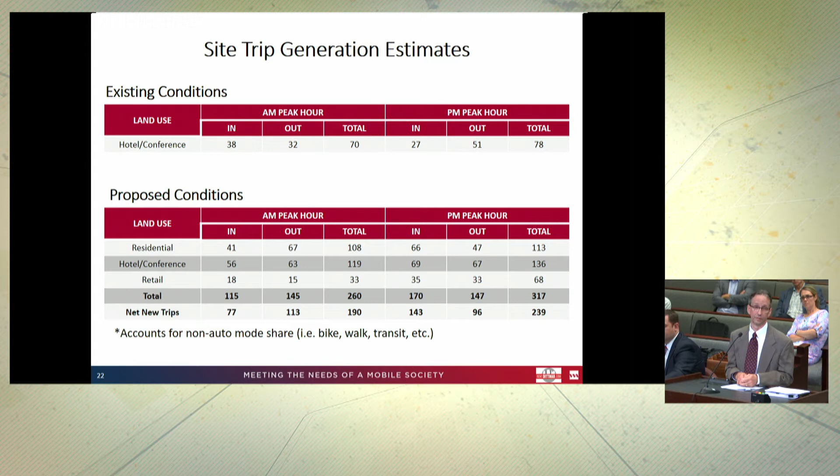So here's a summary of the traffic multimodal study. Again, we looked at 9 intersections, went through the typical scoping process, and looked at 2023 build-out conditions. Under the future conditions, all of the signalized intersections would essentially continue to operate at acceptable levels of service. John, if you could go to the next slide that shows the intersections.

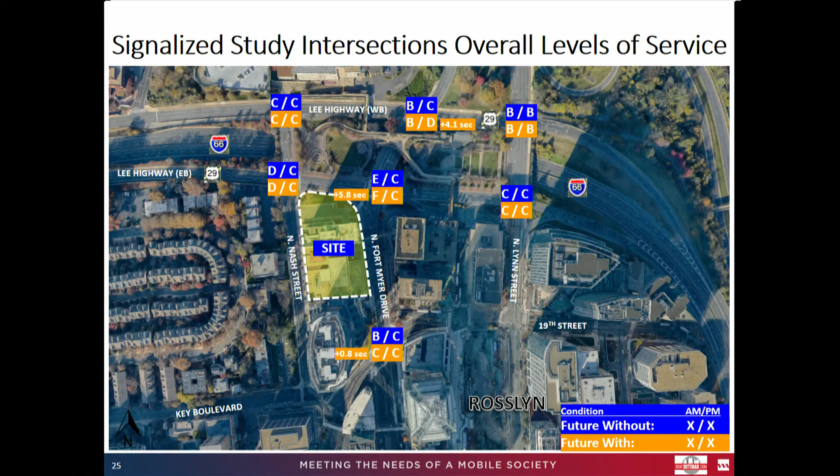Okay, so now we'd like to talk about the parking. So the parking supply, as I mentioned previously, is 818 spaces, in 2 garages. I'll run through some of the on-street parking, then the on-site parking, and then the garage and operations.

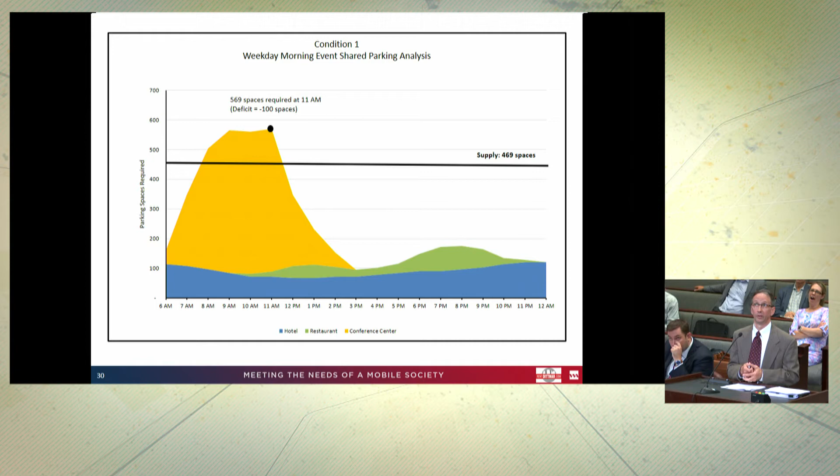This second event is actually 960 patrons. It assumes 2 spaces within the hotel, one with 600 patrons and a second with 360 patrons, and it's an event from 9 a.m. to 5 p.m. This is more like a typical all-day conference.

As you can see, you have the hotel on the bottom, the restaurant space in green in the center, and then the conference attendees who come in the morning, stay throughout the day, and as the conference ends at 5 p.m. it begins to drop off. There's essentially a balance here—we're showing a 17-space shortage under this condition. But under this condition, the non-auto mode share goes up to about 40%, and there's a draw from patrons staying in the hotel, so we're accounting for those kinds of things when looking at the inherent parking demand.

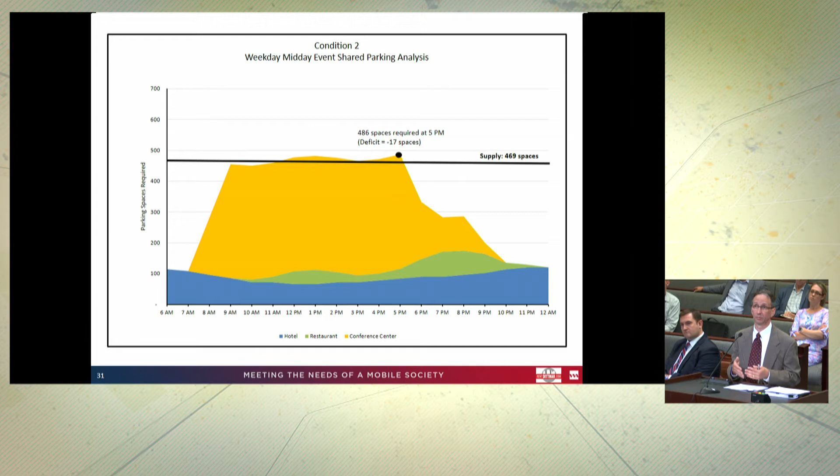The third condition is the weekday evening event, the most intense of all the events. This is also an 800-person event. Demand picks up in the middle of the day but peaks in the evening for the conference center space. This would be like a Friday night event where hotel patrons are coming back to the hotel, and the restaurant is hitting its peak at 8 p.m. When those two overlap with the conference attendees, that's where the maximum occurs.

We're projecting this at 8 p.m. in the evening, with a deficit of 186 spaces. Again, some of that can be made up on the site itself, some would be made up off-site through other parking, and some would be made up by others moving into other modes.

The last event is the weekend condition, a typical wedding on a weekend. The hotel and restaurant space curves are slightly different, but overall similar. The restaurant space is higher here because it's a Saturday, so we expect more activity—an 800-person wedding with attendees and an evening reception. This is lower than the previous case because a wedding has more people staying at the hotel, so the overall demand comes down.

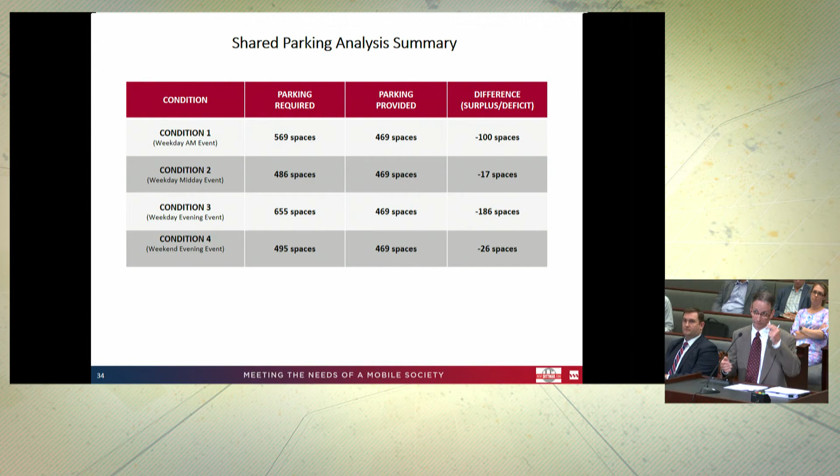The next portion is the Transportation Demand Management Plan. These are all elements I'm sure you're familiar with, typical for this type of project: funding, facilities, carpool, vanpool, and so on. We have a robust network here with plenty of non-auto facilities that help reduce peak hour trips.

One discussion we had at SPRC was: we have 500 residential units, so why do we only have 110 peak hour trips? Most people may own a car, but they don't drive it to work or during peak hour—though we still need parking for them. This speaks to how we'll have a reduction in peak hour trips while still serving the necessary uses.

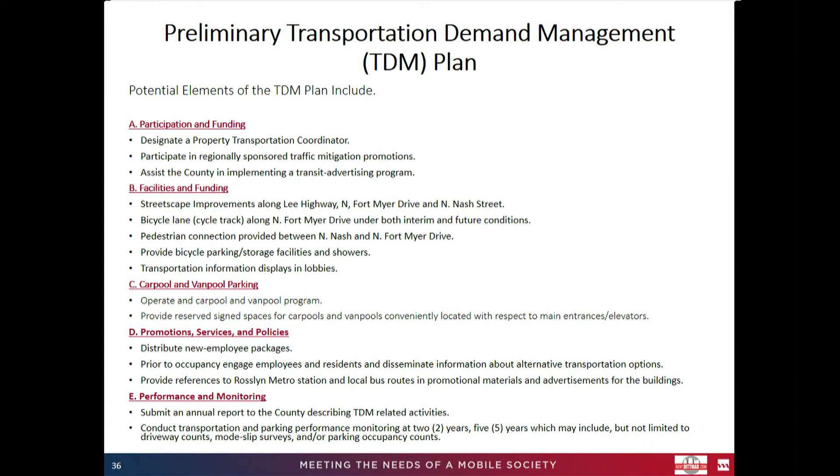Thank you. Does staff have a presentation as well?

Good evening, I'm Dennis Sellin with the Department of Environmental Services Transportation Division. I have a few slides to discuss some of the issues DES has identified with the project.

This project has already been through three SPRC meetings, and fortunately two of our commissioners have been present at those meetings and are aware of the issues. The applicant, I believe, was also intending to bring this project to the board in September.

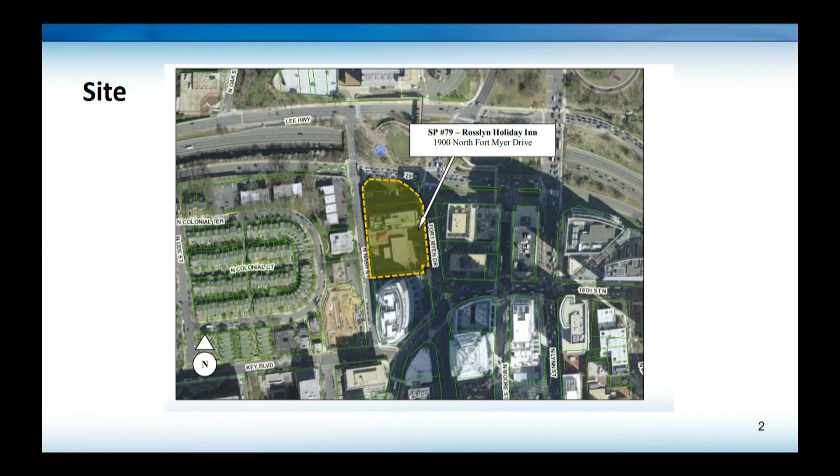One of the overriding issues is that the project is a rezone to CO Rosslyn. There's a combination involved: a site, a street vacation, and a parcel currently owned by VDOT that is to be conveyed as part of the project. So there's a rezone, a vacation, and of course this is a major site plan amendment, which the applicant has already covered.

Typically county staff looks at the overriding policies, and here we have two major documents we typically look at: our Master Transportation Plan, and in this case a recently completed Rosslyn Sector Plan. I've pulled out a couple of the overriding policies we used to guide our review of the Dittmar project.

Those are the design and operation of complete streets, and accommodation of travel growth through shifts to non-automobile modes and improved management of existing streets. I won't read all the verbiage, but those are some of the underlying principles we've used.

With respect to parking, the goal is to ensure minimum parking needs are met while excessive parking is not built, and to allow for reduced parking space requirements for new development. Over the past several years, we've taken specific policy and guidance positions on reduced parking for both commercial and residential projects.

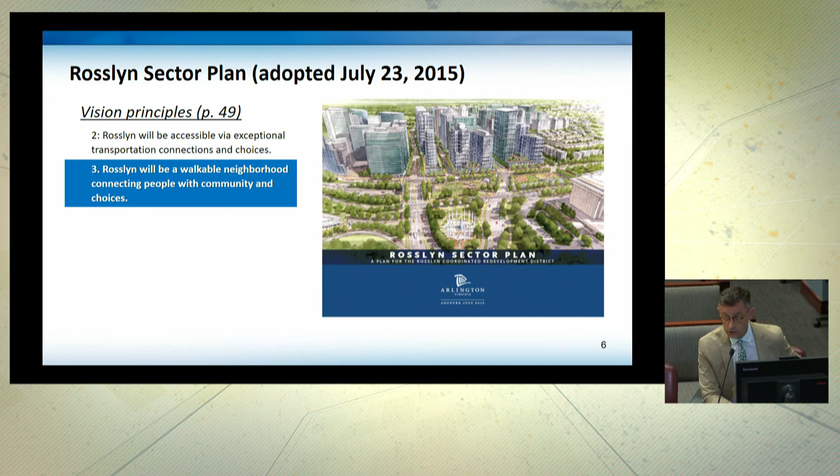So, to be a walkable neighborhood, connecting people with community and choices. When we get to some specifics, especially those affecting this project and site, it's to transform North Fort Myer Drive and Lynn Street into places bringing the Rosslyn community and region around retail, arts, welcoming public spaces, expanded transit and walking connections, to transform the pedestrian and bicycle network into a safer, more attractive, more accessible place to walk and bike, to improve the walking experience with wider sidewalks, new walkway connections, strategies to reduce topographic barriers, safer street crossings, and enhancement of streetscape aesthetics.

Then we get to some of the parking recommendations with respect to off-street and on-street parking. I've highlighted several that are particularly pertinent to this project: to discourage above-grade parking, but permit applying standards for wrapping, and for off-street parking to encourage use of high-capacity vehicle storage technologies. We also have some urban design policies and recommendations that are applicable here as well.

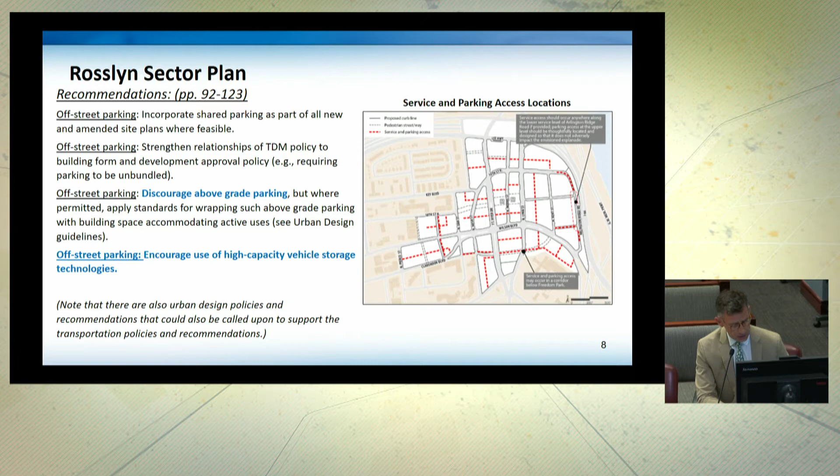One of the outgrowths of the Rosslyn Sector Plan has been the Core of Rosslyn Transportation Study, which has been underway for the past two years. It was either last week or the week before that the team presented its preferred alternative.

I guess I would describe this as having several components, and that will basically be its two key streets: Fort Myer Drive and Lynn Street. Those are going to be multimodal streets that connect the trails at the northern and southern ends of Rosslyn, which are currently not connected, making those north-south connections safe and pleasant places for pedestrians and cyclists.

The major components of the preferred alternative include filling in or removal of the Fort Myer Drive tunnel and the incremental conversion of Fort Myer Drive to a two-way street. The preferred alternative emphasizes enhancing the pedestrian and bicycling networks within the core, including wider sidewalks and continuous protected bicycle facilities on Fort Myer Drive, North Lynn Street, and Wilson Boulevard.

There are changes at the southern tip of Rosslyn, a reconfiguration of Route 50 and Meade Street. While this is a 2030 preferred alternative, our staff does plan to do some tactical one-way cycle tracks on both Fort Myer and Lynn Street as soon as next summer. So this is really a direct outgrowth of the Rosslyn Sector Plan — we will actually be seeing some on-the-ground treatments as early as next summer.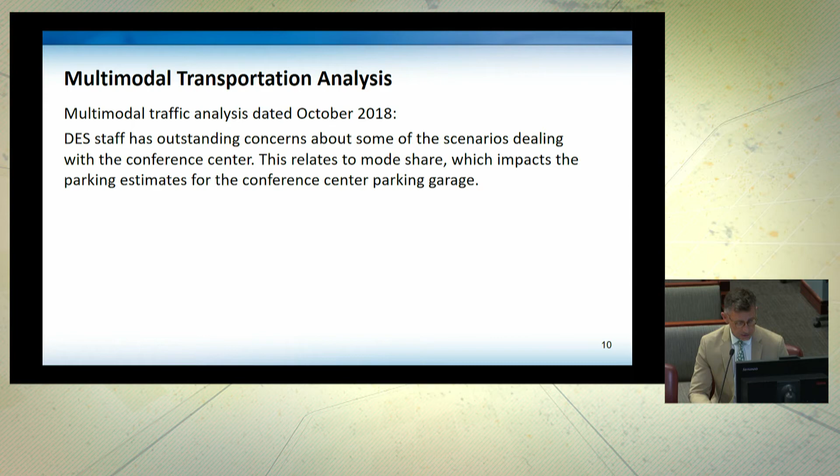It's especially regarding the parking — right now we don't have a way to analyze their parking numbers and validate those, so that's still an open question. We understand the applicant is developing those comps and will have them to us shortly. So that remains an outstanding issue being discussed and negotiated, but we still have questions and concerns with respect to the parking, and county guidelines, requirements, and policies for parking for the hotel and retail.

I think there's a couple of things about the parking. One, we believe it's going to directly affect both the mode share, and it also affects the building bulk and mass — so it has both a transportation and an urban design component.

While there is a 0.7 per room Rosslyn requirement for the hotel rooms, we typically have accepted about 0.5 for hotel. So from 241 spaces, we would consider possibly 172 spaces for that.

There has also been discussion about the conference space, the use of one space per 3 seats with the public assembly space standard that the applicant has referenced. Our zoning administrator has specifically stated that that standard does not apply to conference spaces in a hotel. So that is why this issue about the conference center in a hotel is outstanding. They may be using it as some sort of a guidepost, but it is not to be confused with an actual requirement for assembly space in a hotel.

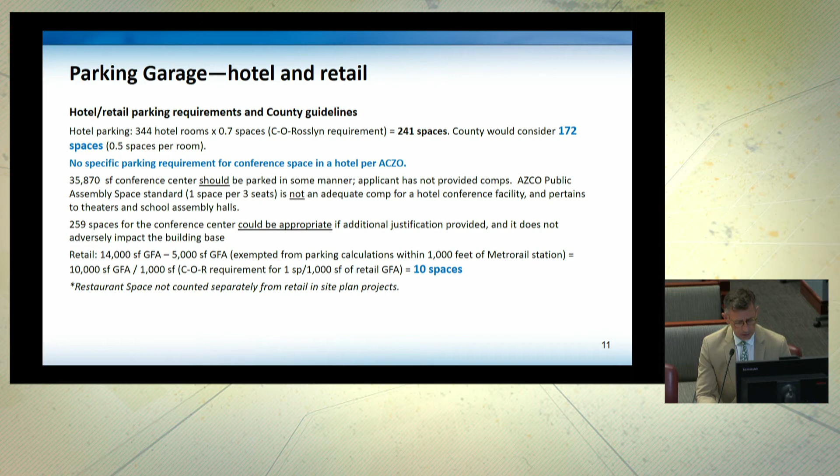So again, we think there are advantages because of the location of this project in the center of Rosslyn that the applicant should be taking advantage of and isn't.

Under some of the new residential parking guidance, it's actually 0.4, which we would consider reducing to 0.2 if the applicant did additional bicycle parking and/or TDM. That means for 500 units, they could go as low as 100 parking spaces, with an additional 25 spaces for visitor parking, so 125 spaces total. I haven't really done the math, but it would be significantly lower than the 818 spaces the applicant is proposing. You can do the math, but it's smaller.

So we get to this issue, and it has to do with the building's base. Under the sector plan, there is a recognition that buildings have a base, a tower, and a top. Here we're seeing the base, and there is 3 to 6 stories recommended, but the applicant has a 10-story base, and a lot of that base is their garage.

So the issue here is directly affecting the architecture, which I know is not transportation, but it's because of what we believe is an excessive amount of parking on this site, which they may be able to justify. But we do believe there are policies and guidance, particularly given the location in the center of Rosslyn, that support a lower number of parking spaces that could and should be provided in this facility. We think the applicant needs to do a lot more to address some of the sector plan recommendations.

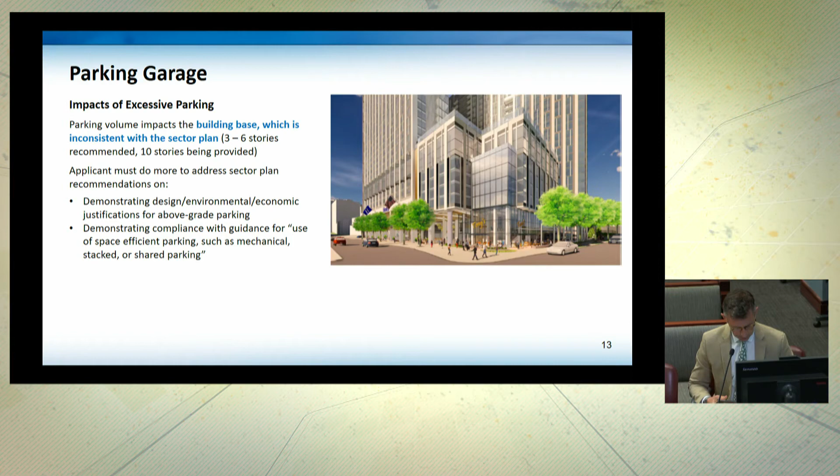One of the things that happens with this kind of facility, especially one that replicates to some degree what the applicant is proposing, is that once the architecture begins subsuming and taking over the Porte Cochere, the relationship between the street and the building face is sort of gone. And so the ability of a pedestrian to relate to the street front, that opportunity is missing. I think that's one of the issues in terms of the pedestrian environment.

The pedestrians are going to be far outside of any ability to relate to any sort of retail environment, windows, doors, and all they will be seeing is basically a vehicular-dominated environment here. And I think for the Rosslyn Sector Plan, we see that as a loss.

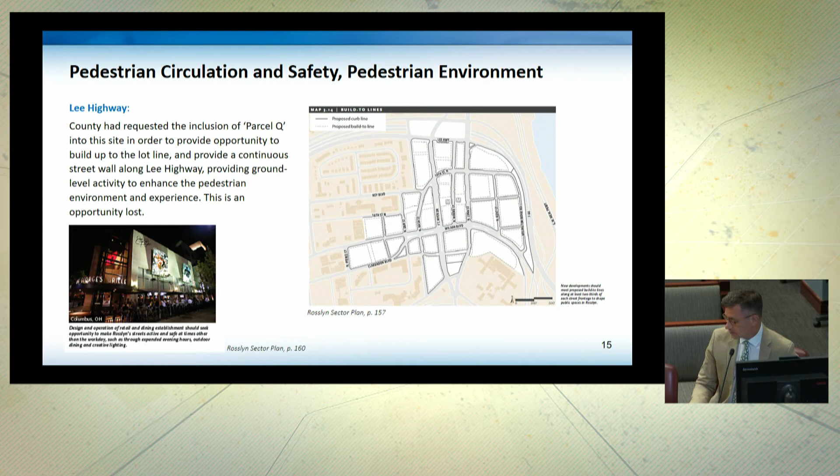And there's only sort of a partial response to that as well. And so I think that that's another sort of lost opportunity for pedestrian experience as well. And I am going to conclude my remarks there. And I think both myself and the applicant representatives are available for any questions.

All right, thank you very much. That was a lot of presentation. Lots of good detail. Anybody in the commission want to kick off?

Commissioner Clement: Yes, there was a lot of comment about this project at the board meeting on June 15th. This was at public comment. There were something like half a dozen different individuals, most of whom were residents of Turnberry Towers, who were alarmed at the scope of this development. And I believe that unless this project is modified to reduce the parking requirement as suggested or recommended by staff, there's going to be some very serious community opposition.

Thank you. I was wondering if we can get the applicant's presentation back up and go back to some of those event parking scenarios. I think scenario 3 is the one I want to go back to. I think that was the one with the greatest deficit of parking spaces.

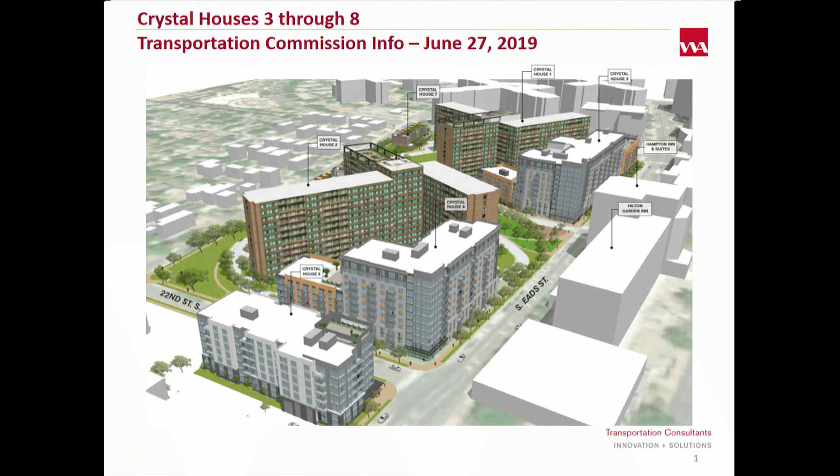All parking for the new buildings, and some of the parking for the existing buildings, which is also important, will be located in below-grade garages. There is and was substantial surface parking on the site serving Crystal Houses 1 and 2. We have so far eliminated a lot of that, and we are looking, as we've gotten comments from SPRC, at removing more of it, continuing to work on that.

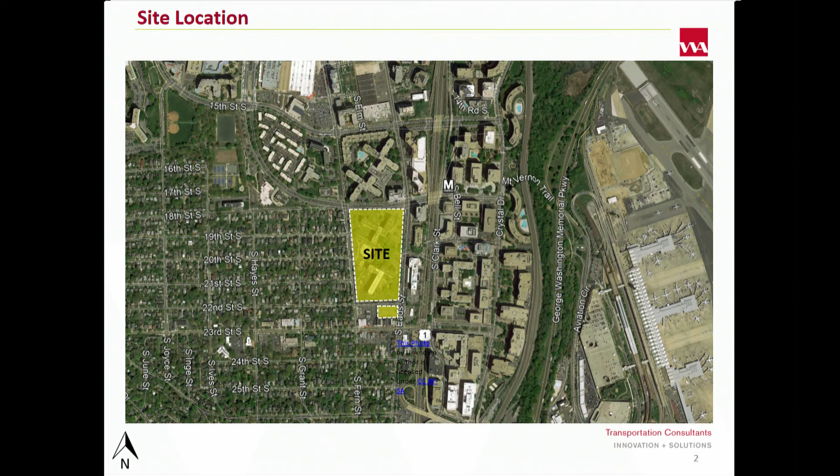Today, the main site is served by 5 access points: 2 along Fern, 1 on 18th, 1 on Eads, and 1 on 22nd. The smaller parking lot behind Restaurant Row has 2 curb cuts as well, 1 on Eads and 1 on 22nd.

Here's an overview of the proposed site. As Nick mentioned, the proposal is to add 6 new buildings, Crystal Houses 3 through 8. You can see the 2 buildings in the middle, Crystal Houses 1 and 2—those are the existing buildings—and around the perimeter are the new buildings.

Starting in the bottom left corner is Crystal House 5. Across 22nd Street is Crystal House 4. Continuing along Eads, the larger building in the bottom right is Crystal House 3. Moving up 18th is Crystal House 6, and 7 and 8 are the townhouse units along Fern Street. The chart shows the units per building, totaling 1,647 units.

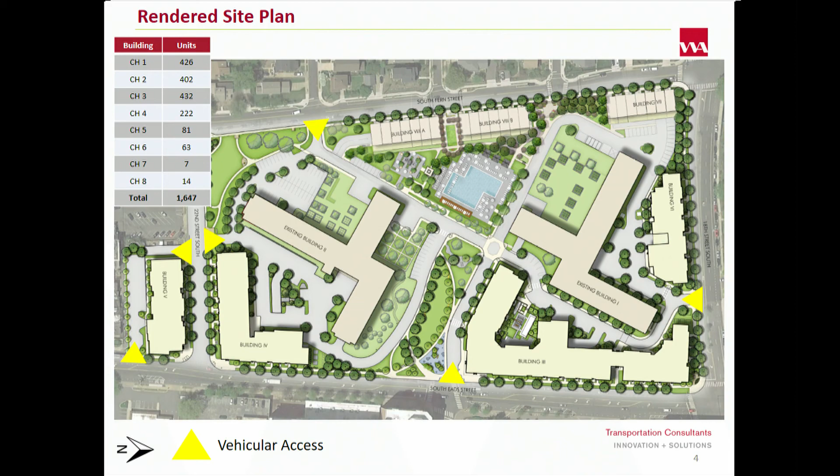We conducted a traffic study looking at 11 study intersections. Counts were collected in 2018, and as is typical with applications in Arlington, we scoped it with DES staff. We found that all the study intersections currently operate at acceptable levels of service under existing conditions. We noticed max pedestrians from our counts were observed at the Eads and 18th Street intersections, and max bicycle traffic is along 18th Street.

As Nick mentioned, the proposed development includes 819 additional dwelling units, which correlate to 133 AM peak hour trips and 157 PM peak hour trips. These rates do assume a 60% non-auto reduction, which is what you find when you look at the census data.

When you look at future conditions in the 2026 scenario, we added in 5 pipeline developments as listed, which are other developments in the area currently approved or under construction that would be open and operating by 2026. We also assumed a 0.5% growth rate at the intersections. In summary, all the intersections would continue to operate at acceptable levels of service with the addition of Crystal Houses 3 through 8.

This graphic shows the nearby transit facilities. We are in close proximity, about 700 feet from the Crystal City Metro Station. There are also numerous bus lines and Capital Bike Share stations nearby.

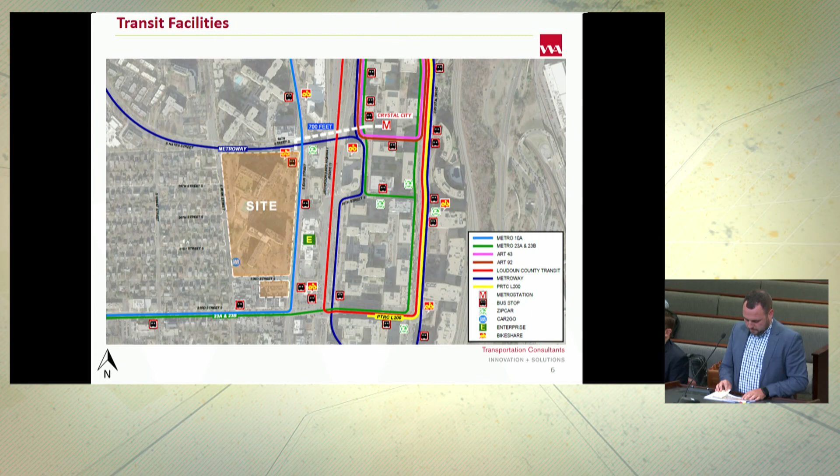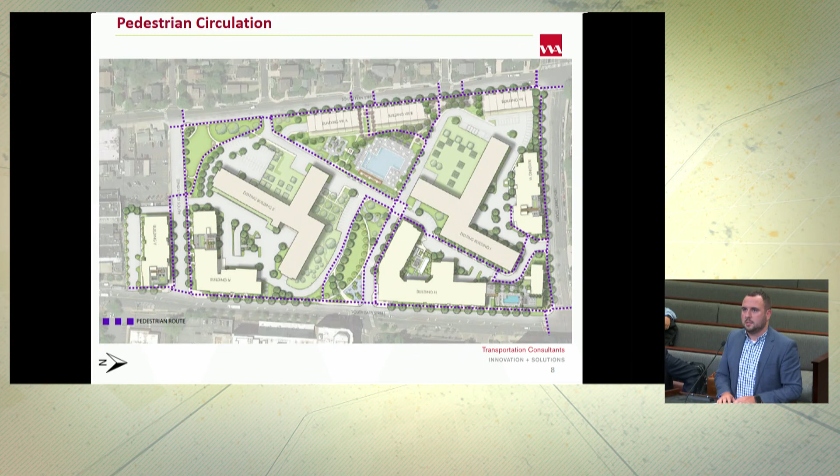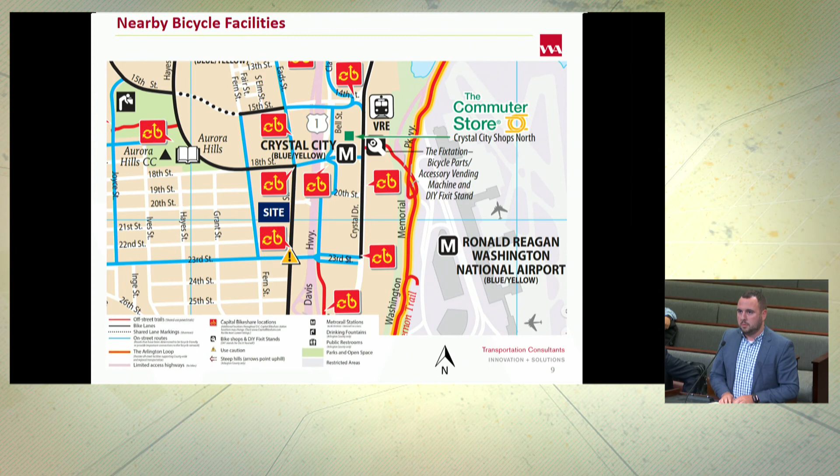This shows nearby bicycle facilities. There are numerous bike share stations in the area, the closest being at the corner of 18th and Eads, right on top of our site, with 11 docks, as well as another station further down Eads with 15 docks. This plan also shows the on-street bike facilities—along Eads there are bike lanes, though this map is a little outdated; the bike lanes now extend all the way up Eads to Army-Navy Drive. There are also bike lanes along 18th Street, and on-street bike facilities along Fern and 22nd.

To summarize the parking, Nick mentioned previously that a majority of the surface parking is being relocated to garage spaces. This provides a brief summary of how the parking delineates amongst the buildings. In total, we'd be providing 210 surface spaces and about 1,000 garage spaces, so about 16% of our total parking would be on the surface. But as Nick also discussed, we're still looking at ways to move more of that to structure.

That gives you a parking ratio of about 0.75, which is in line with Crystal City guidelines. The bicycle parking requirements are 659 Class 1 spaces and 33 Class 3, and we would be providing those. Each building will have bicycle rooms, and racks will be provided at the building entrances for visitors.

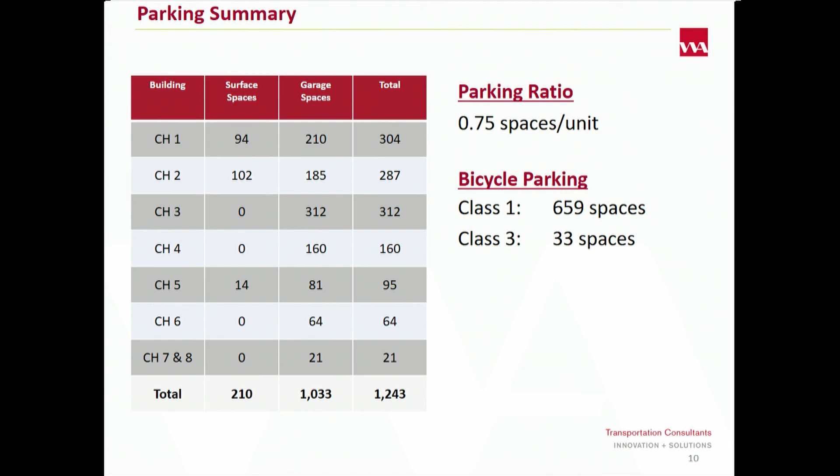Finally, we have here our preliminary TDM plan. A lot of this is very standard—it would involve elements of physical facilities improvements, a parking management plan, promotion services, and performance monitoring. One thing I wanted to mention specifically about physical facilities is we are proposing streetscape improvements along all the frontages to bring it up to the Crystal City sector plan guidance, which has a 6-foot buffer and 6-foot sidewalk. That would be a major upgrade from the existing conditions out there today.

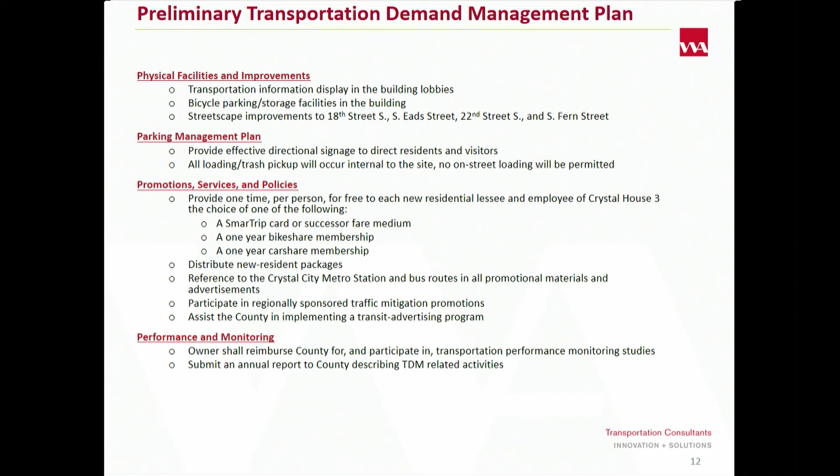And we'd be happy to answer any questions. Thanks.